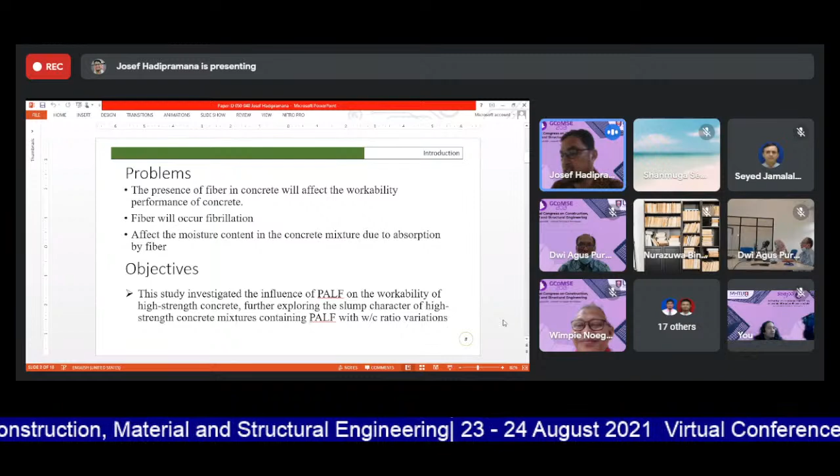Okay. In the meantime, the real problem of this study is that the presence of fiber in concrete will affect the workability performance of concrete. Fiber will cause fibrillation. The presence of fiber in the concrete mixture creates friction between the fiber and the concrete particles and inhibits the flow of the fresh concrete. So that's the fibrillation. Moreover, fiber will affect the moisture content in the concrete mix, and then the mixture will dry due to absorption of the fiber.

Therefore, the objective of this study is to investigate the influence of PALF on workability in high-strength concrete, further exploring the slump character of high-strength concrete mixture containing PALF with water-cement ratio variation. Okay, this is the material and method here.

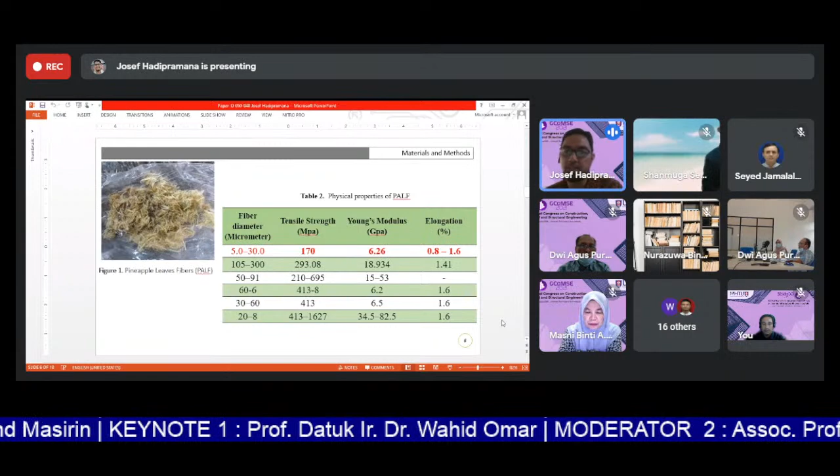Table 1 shows the result of analysis of concrete material properties as constituents of concrete to develop the high-strength concrete by Indonesian national standard. This is a figure of pineapple leaf fiber. The fiber has been processed and separated from the rest of the leaf. Each fiber has a diameter of approximately 12 micrometers, with a tensile strength of 170 megapascal.

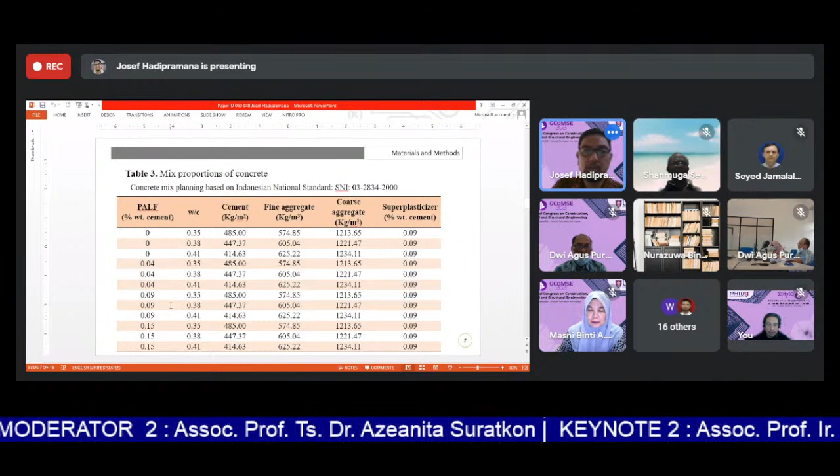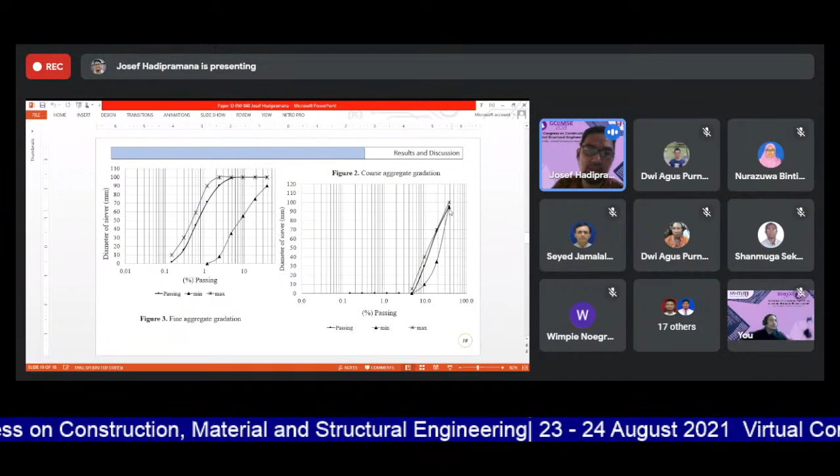So result and discussion. Figure 2 and 3 show the result of the sieve analysis of coarse and fine aggregate. This is the coarse. This is fine aggregate gradation. Both are included in the condition of high quality concrete aggregate. So the passing gradation is included in the condition of the standard here.

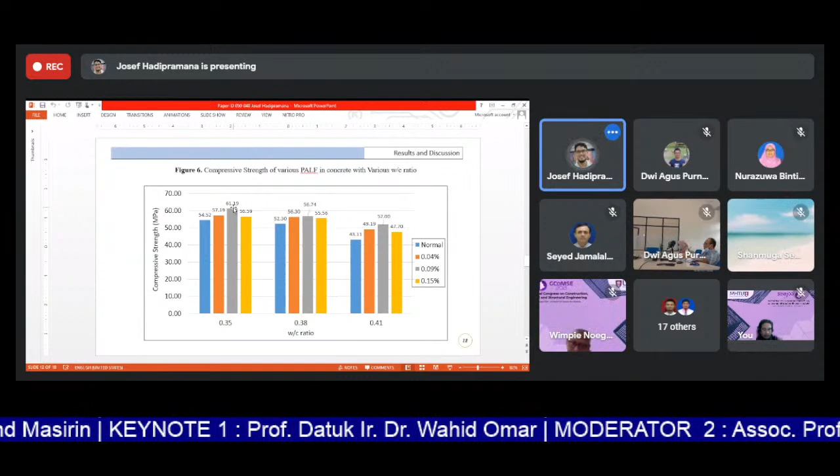Figure 6 shows the relationship of concrete strength between water cement ratio and compressive strength, where the strength of concrete with the lowest water cement ratio, 0.35 here, is the highest compressive strength. This can be understood because all studies show decreasing the water cement ratio will increase the strength of concrete. And in this study, the variation of 0.09 weight of cement is the highest one.

Figures 7a, b, c, and d show the relation between three variables: compressive strength, water cement ratio, and slump. These four images map the tendency of these variables for four PALF variations: normal, 0.04, 0.09, and 0.15. So in all variations the trend is the increase in water cement ratio, coupled with the slump in the yellow one, along with decreasing compressive strength. So all trends are similar here.

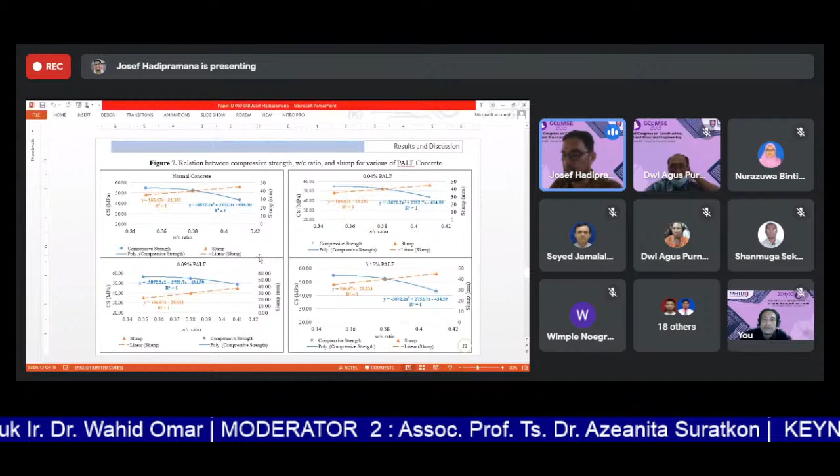But what is interesting is that the strength value of the four images here, for variables against the water cement ratio, is the same constant. We can see here the number is still the same, constant against the water cement ratio.

So the conclusion of this study is the addition of fiber in high strength concrete affects the slump value, but with water cement ratio and PALF percentage amount, they reduce the effect of the reduction. Lack of water due to absorption of fiber can be overcome by adding water following the absorption capacity of water by fiber. The low water cement ratio increases concrete strength despite PALF presence in concrete. The presence of PALF in concrete helps in bridging micro cracks in concrete, thus increasing the compressive strength of concrete. The relationship between concrete strength and water ratio has the same tendency for concrete with all PALF variations.

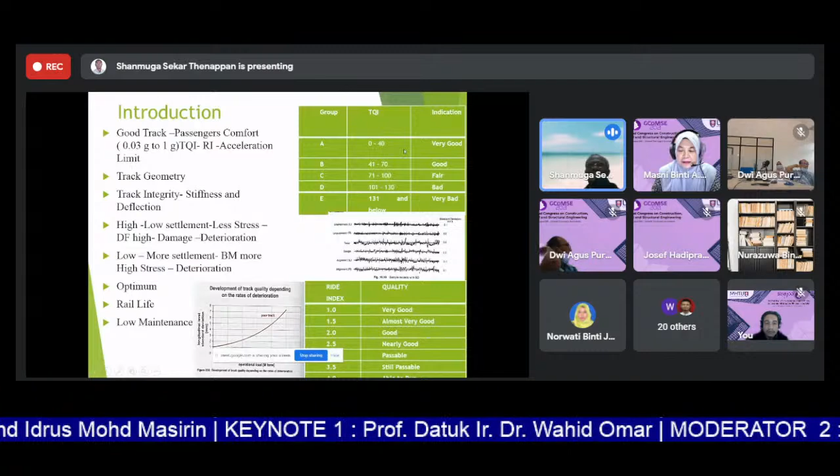Normally, after completion of the track - that is the ballast track - there is a machine called the track recording machine. That machine will measure the track quality index, the TQI. You see on the right hand side, that is the table, that is the rating. This TQI is the rate of 6-7 parameters in the railway track.

That is right and left level of the rail, the alignment of the rail, the twist, and the gauge of the rail - whether it is well maintained within tolerance. This is the average of the standard deviation of the readings. It will be captured by the track recording machine. That should be maintained for good track quality. It must be in the range of 40.

In the meantime, the ride index is measured in the car, and that will tell the jerk level. Jerk level is the acceleration limit, calculated for every kilometer. That has to be maintained in a very good condition, which is rated 1. This is how the rate of the track is measured.

This is how it is measured in the track. So the end goal of this is, when on board, the passengers should feel comfort - that means no jerk. The acceleration limit they have to maintain is 0.03 to 1 G.

Then, this is maintained by means of track geometry. If track geometry is perfectly okay, then you can maintain it. Then how is it maintained? It depends upon the track integrity.

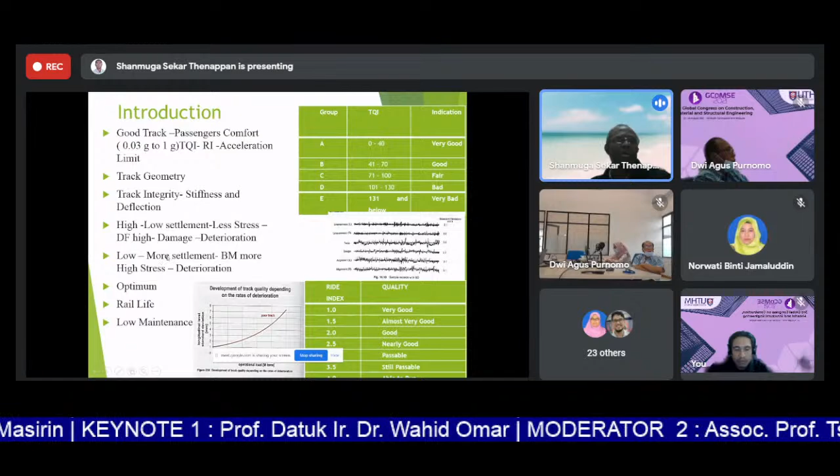Then what happens if the stiffness is low? If it is low, the rail will settle, the bending moment will be more, the stress in the rail will be more, and finally the deterioration of the track will be more.

So what will be the optimum value? According to research, many researchers have concluded there is no universal value, because it depends upon the specification of the project. What is the requirement? It varies. So we have to find out for this specific case.

Then if everything is okay, the rail life will be increased, and consequently the maintenance cost will be low. The picture here shows the behavior of the TQI, the operational load, and the condition of the track behavior. You can see as the load increases, for a perfect high-speed rail track, it will be maintained flat. When it comes to a poor track, it will be increasing.

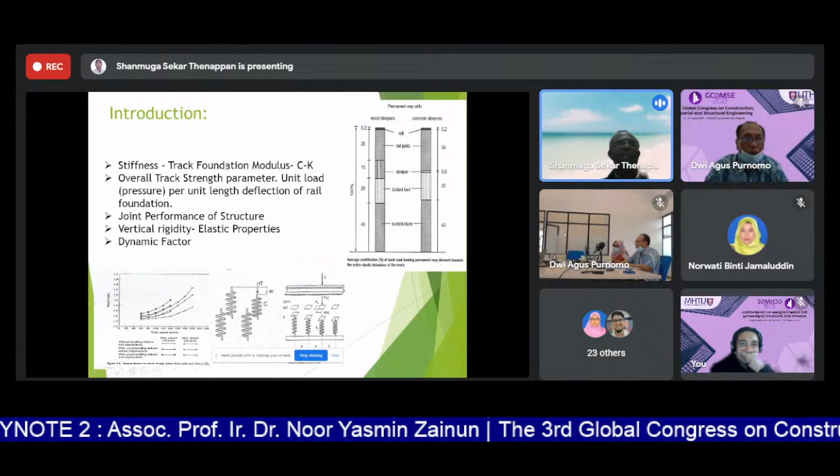Next, when it comes to stiffness, I would like to define it. Stiffness is referred to and defined in various literature and books by various names - it is called the track foundation modulus, or the value C, or in other literature normally they call it K - but the value is all the same, it is a derivative of the foundation, that's all. Then come to this definition, that means the overall strength parameter.

C is the overall track strength parameter. It measures the unit load pressure per unit deflection of the rail. It's actually the spring action - that is the pressure per unit deflection. Then it is a joint performance of the structure. You see on the right hand side, this picture shows the total contribution of stiffness to the entire track.

I take a concrete sleeper ballast track. You can see from this 43% that the substructure is contributing. That is the subgrade. Then there is a 22, that is the ballast bed, that is the ballast. Then there is a 0.8. Then the rail pad is 34 and a 0.2.

So this depends upon the vertical rigidity of the substructure. That is the major parameter contributing, the elastic parameter. Then the other factor is the dynamic factor. This dynamic factor is multiplied, normally as a compensating factor for the dynamic effect of the moving load.

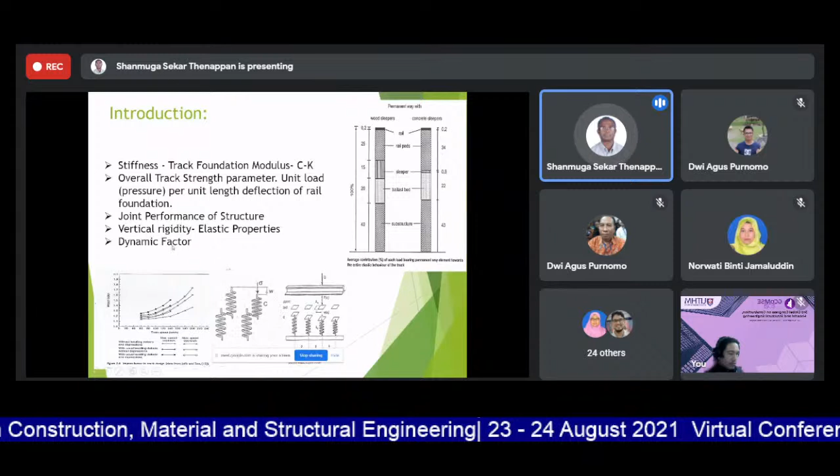This factor is multiplied in the design of the rail. By seeing this picture, on the left hand side, as the speed increases, the dynamic factor increases. Also the irregularity of the rail and the track condition, if it is very bad, it will also be increasing.

Then come to the problem statement. In the double tracking project in the northern part, the TQI index, what I showed you earlier, after completion of 5 years, it is maintained in the track at 40. You see on the right hand side, the standard deviation - as the load increases, the period increases, the standard deviation has to increase.

But what happened here is after 5 years also, it looks as if it is a very, very good track. That means the standard deviation is not following the trend. Overall, it is concluded, there is doubt that the stiffness will be very high.

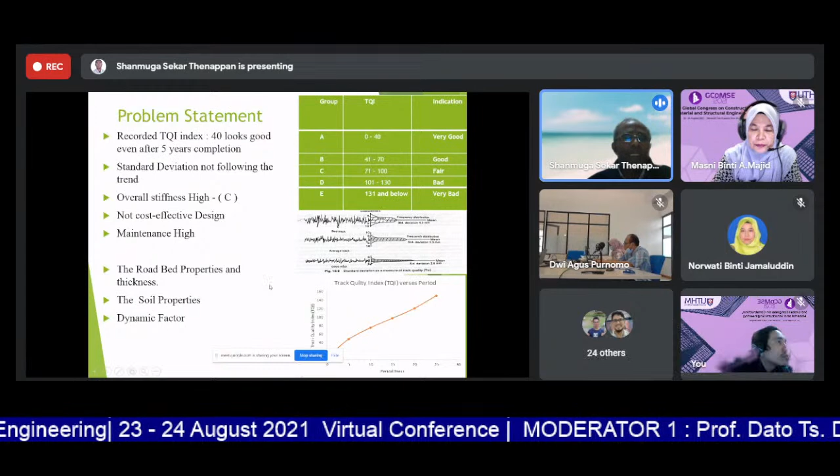Then it leads to a not cost-effective design, and it may result in relatively high maintenance. So there is a necessity to investigate the roadbed material and thickness, and what are the soil parameters and the dynamic factor assumed in the design. So the author is interested in investigating this.

As I told you, the track stiffness - I have to touch a little bit on the track stiffness, the C value, and how it is used in the design. There are two methods being followed in the ballast track industry - one is the Zimmermann method and the other is the DSM method.

The Zimmermann method is a continuous method. This is a discrete method. The discrete method is a discrete support model, while this is a continuous beam method. The difference between these two is not much, it's more or less the same. But anyhow, the discrete method is more accurate.

So I compared the two designs used in the double tracking for the northern section and the current method. I compared the rail stress computation. The general formula is the same, with the dynamic factor.

Then come to the mean stress - how they calculated it in this method, the Zimmermann method. They use the C value directly. When we come to the modern method, they have used D, which is actually a derivative of the C value. There is no problem with this.

But the thing is here, in this method, the contribution of the bed is not included in the Zimmermann method. Then come to the dynamic factor in this method.

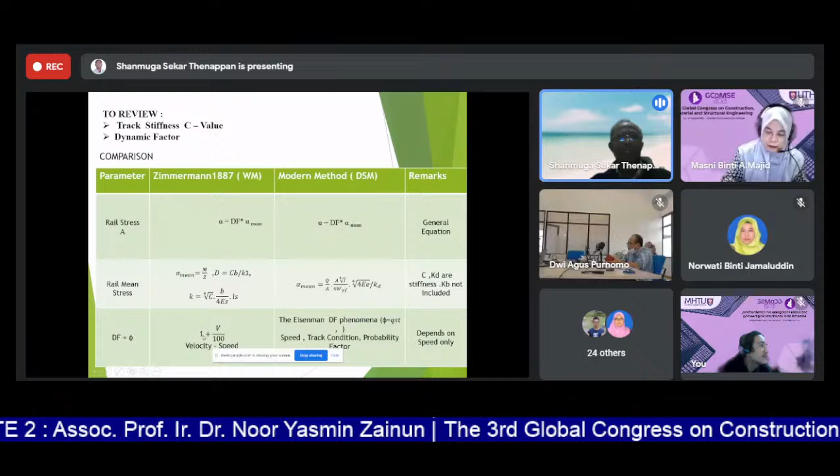Dynamic factor - according to the design, they use only velocity, the speed of the train only, they have used. But that is not the only contributing factor. Of course, V is a contributing factor, but the other factor, according to the modern method, the Eisenman method.

You have to look at the track condition - what type of track you are using, whether high-speed track or normal track. The track condition factor you have to use, then how much accuracy you need. So this dynamic factor is a multiplication of three factors, that is more appropriate. So depending on speed only is not appropriate. So this is problematic, this is the problem.

So the problem stated here is there are two things I have to investigate - the track stiffness and dynamic factor. Then come to the objective.

So in this, I have to optimize the track design based on the C value by using a simple plate bearing test. Plate bearing test is a simple test. This one does not require stopping the train, it is very easy to measure.

No implementation of stopping the train. It is very easy, construction-wise easy, labor-wise it is very easy. Then I have to evaluate the appropriate dynamic factor by using the modern method.

By doing this, you can choose the maintenance cost, which will be reduced.

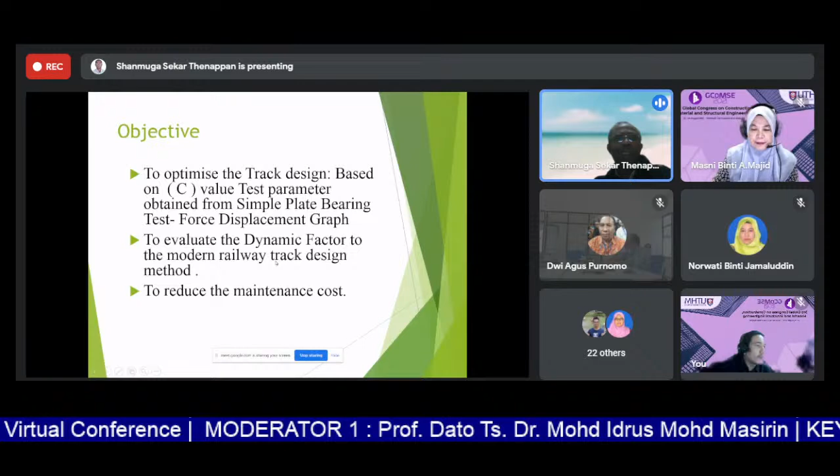Then the review methodology. Rail stress is evaluated by the plate bearing test, determination test using the double tracking project test result. Then, other thing I am doing is the finite element analysis using the same plate bearing test for different thickness of the ballast and how it varies with the subgrade soil.

Subgrade soil I categorize into 3, low to high.

So let me explain how the rail stress is analyzed. There are 4 steps. First is the plate bearing test, which is carried out. The C value is determined. That is the strength of the overall track.

Then the mean bending stress. Then you determine the dynamic factor, then multiply with the dynamic factor. Then this final stress is to be checked for whether the fatigue strength is allowable or not.

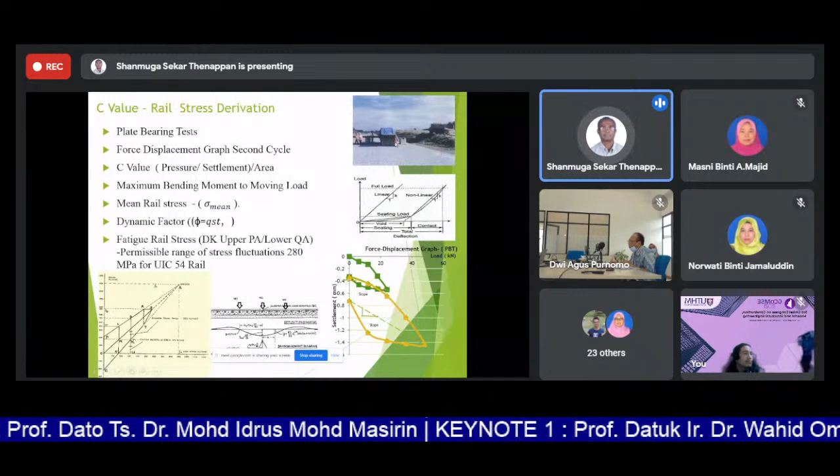Let me explain the steps I told. First is the plate bearing test. This is the test - you can see on the right hand side, the track is completed. It is ready to lay the sleeper. This is the plate bearing test site.

You can see this field test has been carried out at the double tracking project. There is a load cell here. This is a schematic diagram.

The load applied is the rail seating load, in two increments. This is the first cycle and second cycle. The graph is drawn for the first cycle and second cycle.

This first cycle, it's like immediately the track with the voids - that means, let me go back here. It is actually an idealized diagram for the plate bearing test.

When it is the first cycle, it will be linear. When it comes to the second cycle, all the voids are filled. After tamping the track, it will be simulating the accumulated loading. That means the actual stiffness of the track can be measured by the second cycle. It is actually a non-linear behavior.

The slope of the thing is calculated, then the C value divided by the area of the plate used, then you can get the C value. C value is the pressure by area. This is the parameter we are getting from the test after completion of the track.

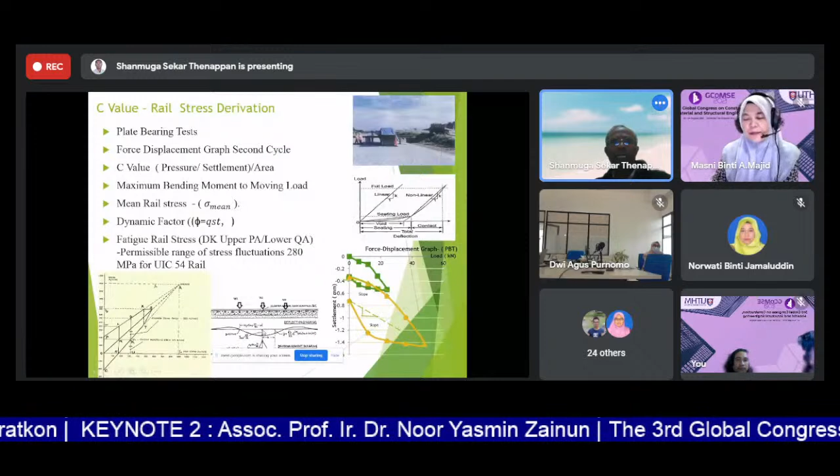From the C value, we calculate the bending moment using the Zimmermann analysis. I am using the 3-wheel load, the envelope of the bending moment and the deflection you have to get from the Zimmermann envelope. After getting this, the rail stress is calculated.

Then it is multiplied with the dynamic factor. After getting the dynamic factor, we check whether the fatigue rail stress is within the limit or not. We have to check with the Smith diagram.

The left hand side is the Smith diagram. From O to A, that is the envelope - the envelope is the mean stress. The allowable limit is from P to PA and Q to QA.

When we come here, we are using the UIC 54 rail. This 54 rail has a value of 900 - 900 is the yield strength. The allowable FY is 540.

So the stress limit is, you have to maintain within this. What is the stress limit for this? It depends upon what is the temperature in the country and what is the manufacturer's residual stress.

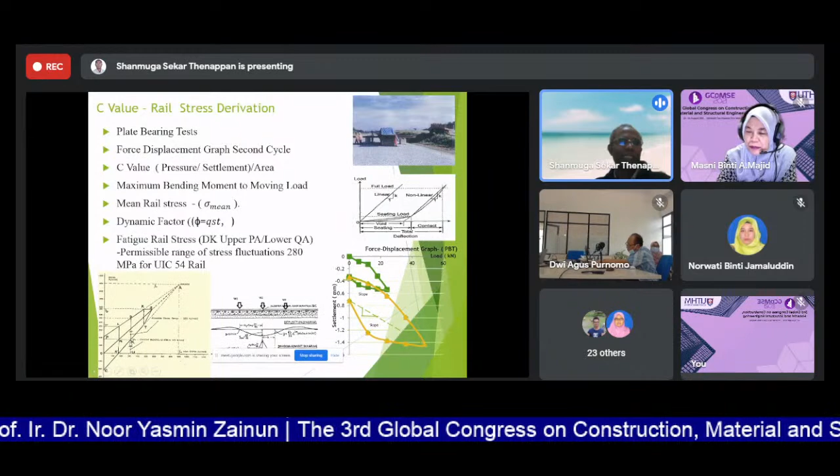That residual stress from the x-axis is 180. So this is the limit, they cannot exceed it - this limit is 280. This is the way to get the final stress in the rail.

Then coming here, after that what I did is a numerical analysis. I modeled the plate bearing test as a simulation of the track. That is 2 methods I did - one is static, another is dynamic analysis.

The static model represents the subgrade, subballast and ballast. This subgrade I take as 3 subgrades, one in the range of 25 to 48 - that means low, medium, and high, according to whatever soil is available at the site.

Then the subballast and ballast - the subballast is constant. This is the ballast, varying from 100 to 500. So overall, this material is a granular material from 600.

By the finite element analysis, I am varying this thickness for the different subgrade, and the deformation I got from the analysis - that is the static analysis. The aim of the static analysis is to find what will be the deformation for different subgrades and different ballast thicknesses.

Then coming to the dynamic analysis, the same model has been used. In this model, different speeds have been created to get different frequencies for different speeds, to get the dynamic stress at the subgrade level, so as to find out the dynamic factor.

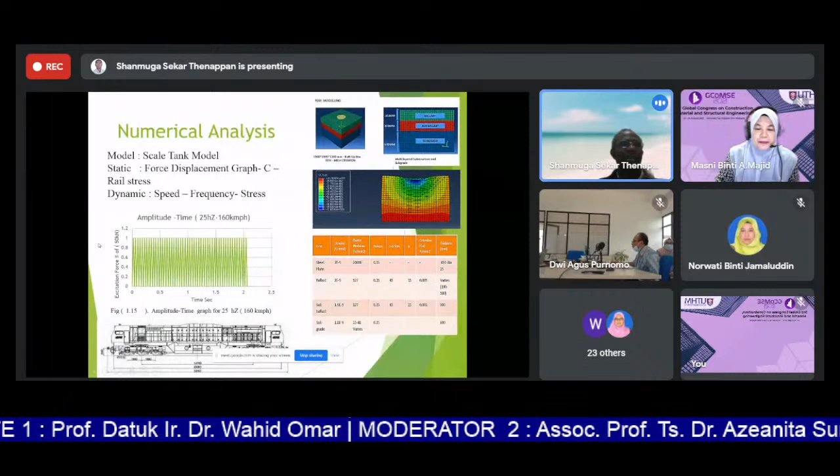So for this, I have used the load, the 50 kilonewton load which comes to the rail seat, coming to the one rail seat, 50 kilonewton. The load I use for this is a KTM double track. They use the locomotive with a 200 kilonewton. This is the locomotive. Then this figure is what I created, the amplitude time graph for the maximum speed 160

km per hour. So the aim of this is what is the dynamic factor derived from the finite element analysis for this 160 km/h. So coming back to the result, the result what I got is this vertical displacement for the different grade. Then is a ballast thickness. Then I got the derived C value. Then is a mean stress.

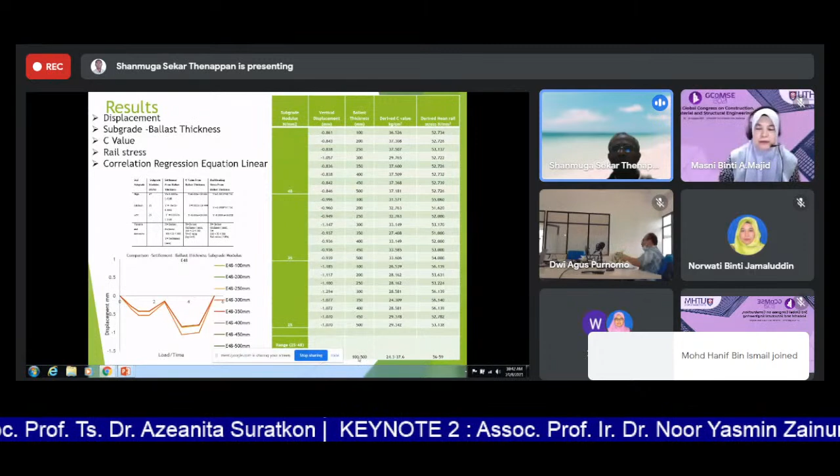So this range is 25 to 48. This is a vertical displacement, from maximum to this is the range. Then the ballast thickness is 100 to 500. Then derived C value and derived mean stress. Then this is the first cycle and second cycle picture of the displacement graph for the 48 grade. We can see the displacement is increasing. The maximum we got is 1.2.

After getting this data, I have simulated the graph. I found the correlation equation for this. I got the correlation equation for the different subgrade or the different thickness. What will be the expected C value and rail bending stress?

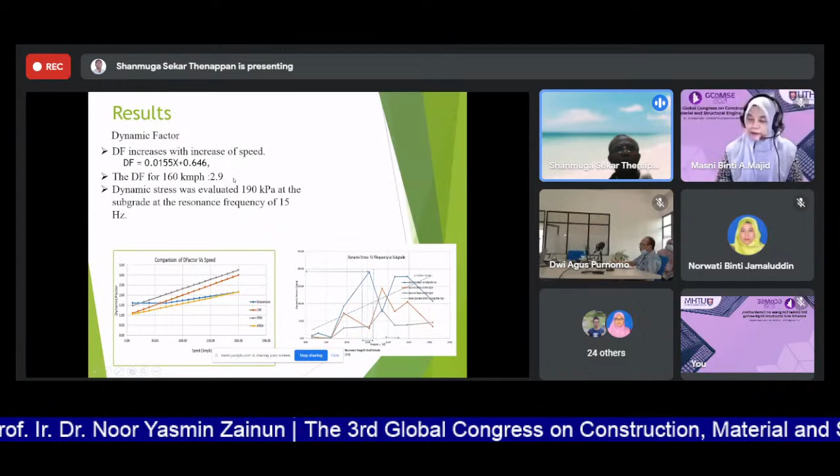Then come to the dynamic factor. The dynamic factor from the analysis, I got the linear equation, this equation for the dynamic factor 160 km per hour based on the Eisenmann method. I got the 2.9. This is the dynamic stress at the subgrade for the different subgrade. This one I look for only 300 thickness because the project they use the 300 thickness.

Then this figure is a dynamic factor. I compared to the other modern method, JNR method and other methods. The finite element method is a little bit high. This is the dynamic factor obtained from the finite element analysis. What I am getting for the 160 km per hour is a 2.9.

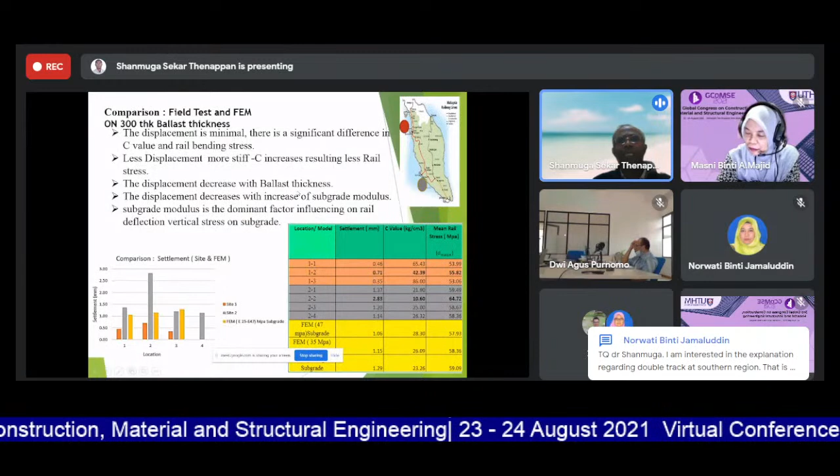Actually the displacement is minimal, but there is an increase in C value and rail bending stress. The less displacement, it will be more stiff, and the rail stress will be less. The displacement decreases with the ballast thickness. The displacement decreases with the increase of subgrade modulus. The subgrade modulus is a dominant factor, which is controlling the deflection and the vertical stress on subgrade. We can conclude from the graph.

You can see this one, the site 1 and site 2 and the finite element analysis. The finite element analysis settlement is also in agreement; it is between the two values. Then comparing these two, site 1 we got is 0.7 mm, site 2 is 2.8 mm. It looks like the rail experiences less bending stress in site 1. It is much stiffer than site 2.

The allowable live load stress by using the Smith diagram, the allowable limit for this is 280 MPa. When we interpolate for our country, this allowable limit is 280 for the live load. So site 2 reaches 187 to 280, that is nearly 74%. Then site 1 is 161 to 280, that is 80%. This zone is a free zone.

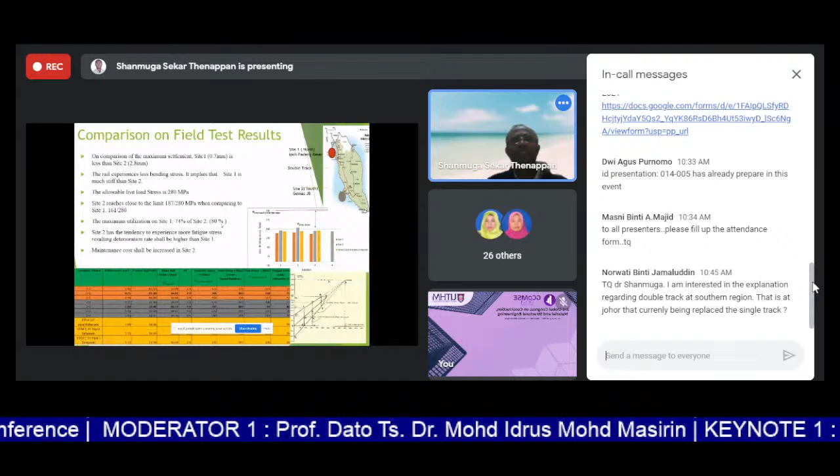That means 80% is achieved by this one, 74 is achieved by the site 1. So what we can conclude, site 2 has the tendency to experience more fatigue stress. The deterioration rate will be higher here. Then ultimately site 2 experiences more maintenance cost.

So in the conclusion, static and dynamic analysis of ballast track structure has been studied for the different railroad bed conditions. That means different ballast thickness and different subgrade soil, using numerical methods. In this, we have taken into account the elasto-plastic properties of the subgrade soil and ballast. That is, non-linear behavior has also been captured.

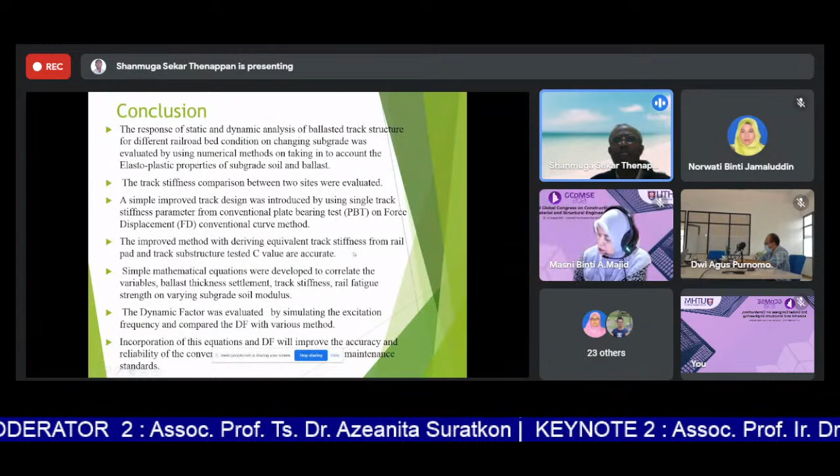The track stiffness comparison has been made by the two sites. A simple plate bearing test method, from which we use the force displacement graph, is a conventional graph method, which is very cheap when compared to the new method, which requires more implementation, stopping the train, and the labor cost will be very high. The improved method I adopted is an equivalent track stiffness added with the rail pad.

It is an accurate method. Simple mathematical equations were developed to correlate the variable ballast thickness. This will be very useful for QA/QC control. The dynamic factor was evaluated simulating the excitation frequency and compared with the various methods. Incorporation of this dynamic factor in the equation will improve the accuracy and reliability of the track construction. Then we can maintain the maintenance standard. Thank you.

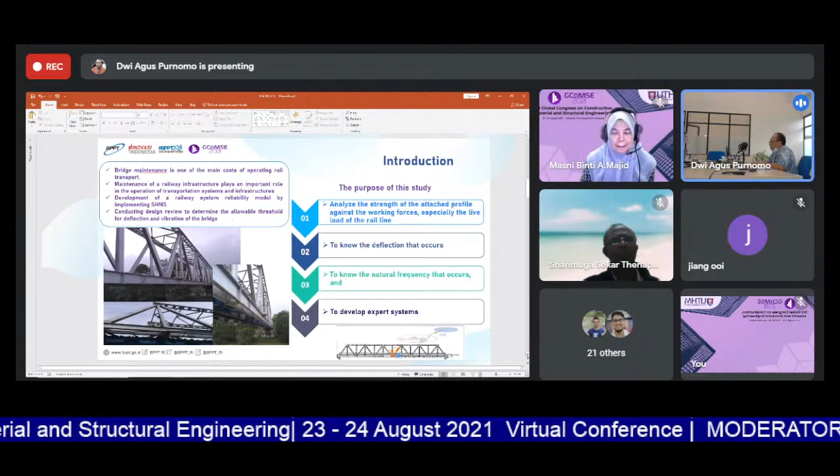Why did we choose the title initial implementation? Because we don't have the workshop drawings of the railway bridge that is my research object, so we start from zero in this research. Based on the history, we found that bridge maintenance is one of the main costs of operating rail transport. The maintenance of railway infrastructure plays an important role in the operation of the transportation system and infrastructure.

Then we develop a railway system reliability model by implementing a structural health monitoring system and conducting a design review to determine the threshold levels for the deflection and vibration of the bridge. The purpose of this study, first, is to analyze the strength of the steel profile against the working forces, especially the live load of the rail line. Second is to know the deflection that occurs, third is to know the natural frequency, and fourth is to develop an expert system.

Next, we move on to the literature study. We found that in Indonesia many railway bridges were built more than 100 years ago. Many of those bridges have become structurally deficient due to gradual deterioration over time. The loading conditions of railway bridges have changed in recent decades due to increased freight volume, and there has been increasing demand for improved transport infrastructure in Indonesia.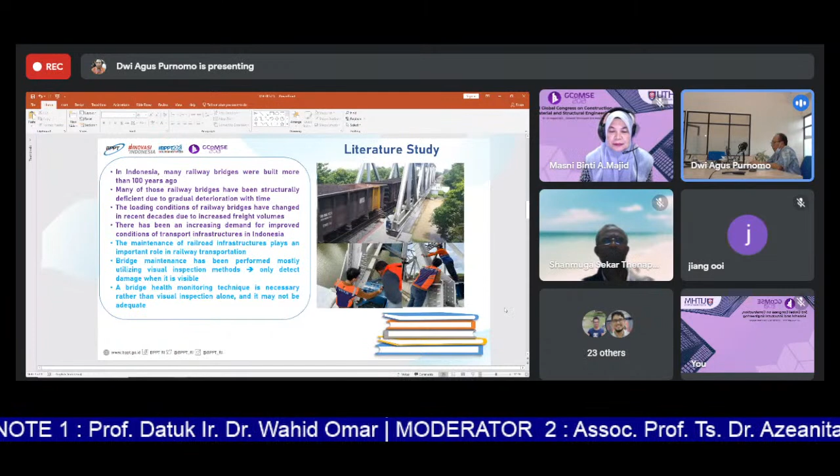The maintenance of railroad infrastructure plays an important role in railway transportation. Bridge maintenance has been performed mostly using visual inspection, which only detects defects when it is visible. A bridge health monitoring technique is necessary, since visual inspection alone may not be adequate. Next, we move to the research methodology.

On the left side is a flowchart of the study activities for the railway bridge. The bridge is located in South Lampung, Lampung province, near Tegineneng district. We start from the primary data and the reference standards. With this primary data we enter the bridge modeling, where we apply many types of load, like live load and others, and then we analyze these loads to find the deflection, stress, bending moment, normal force, displacement, and natural frequency.

Through this data, we use a dashboard design to evaluate the structural health of the bridge, and that is the end of the study process. Based on the research methodology, we discuss two matters. First is to evaluate the existing steel railway bridge structure.

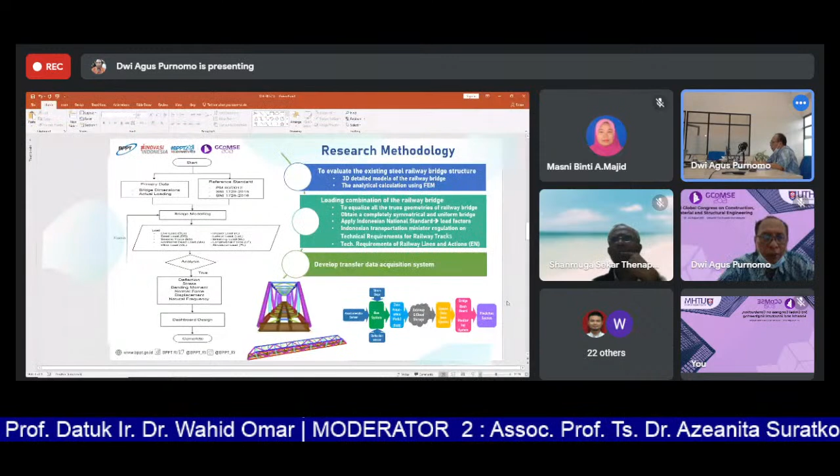In this case, there were a 3D detail model of the railway bridge and also the analytical calculation using FEM. And then we discuss the loading combination of the railway bridge. In this case, there were items to equalize all the truss geometry of the railway bridge and obtain a completely symmetrical and uniform bridge. And also we apply the Indonesian national standard and also the Indonesian Transport Minister regulation on technical requirements for railway tracks, and also technical requirements of railway lines and actions. These are the 3 standards we use to optimize my analysis.

And then the other methodology is we develop data transfer acquisition. Based on the data acquisition, the structural health monitoring system covers the components of the data retrieval process via a sensor system with parameters of deflection, stress on the bridge, and vibration. Via the base system, the results of sensor monitoring are processed and sent directly to the data acquisition module, or DAQ, in the bridge location area.

The results of the DAQ data collection are sent to storage through the gateway into cloud storage. The infrastructure control center can utilize the actual data on cloud storage to monitor bridge condition online in a dashboard. Based on the data set on the cloud storage, and a view of the bridge aspect in the near future, the bridge health prediction system can be developed. This is the drawing on the right side below. This is the process of the sensor data transfer flowchart.

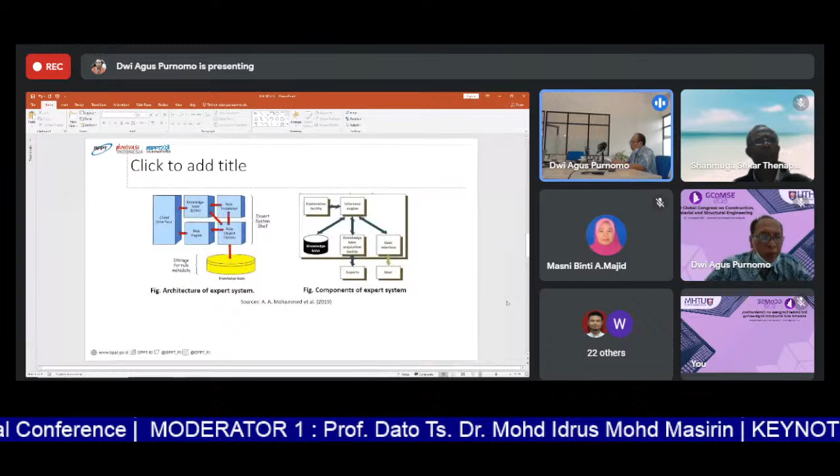And next, this is a highlight of the architecture of the expert system involved in my research. The left side is the architecture of the expert system, which consists of the client interface, knowledge base editor, rule translator, rule engine, and rule object process. And the expert system is involved with the knowledge base.

And the right side is the components of the expert system, where we involve the inference engine supported by the explanation facility, and with the inference engine we involve the knowledge base, the knowledge base acquisition facility, and also the user interface to support the expert and user. Next page. We discuss the results and discussion.

We discuss the structural characteristic, maximum capacity. In this case, we found that the loads acting on the bridge are not greater than the bridge capacity, and the ratio of the applied load to the bridge capacity is less than 1. And we discuss the maximum bridge deflection. In this case, we found that the maximum deflection limit for the frame is L/1000, or equal to 51.6 millimeters.

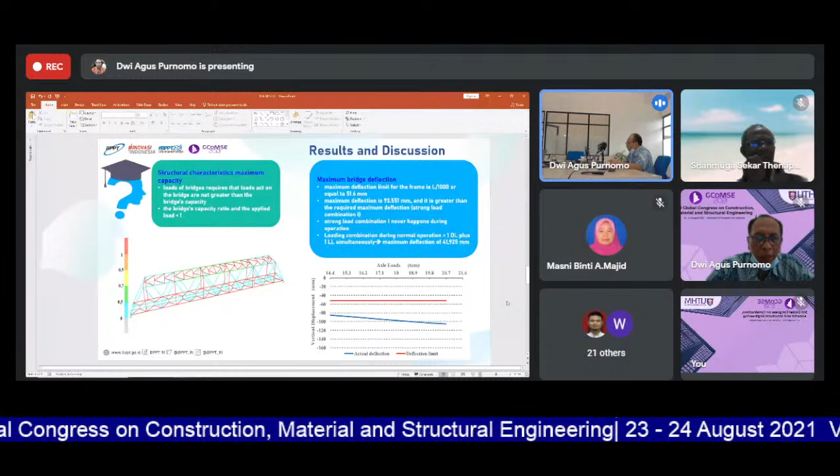The maximum deflection is 93.551 millimeters, which is greater than the required maximum deflection. It means strong load combination 1. Strong load combination 1 never happens during operation. And the loading combination during normal operation equals 1 dead load plus 1 live load simultaneously. Therefore, the maximum deflection is 41.925 millimeters. In the drawing on the lower right side, the red line is the deflection limit and the blue line is the actual deflection.

And this is the maximum deflection of the railway bridge we researched. The left side is the drawing of the bridge capacity ratio. And based on this drawing, we collect data to be accumulated in the dashboard design. Next.

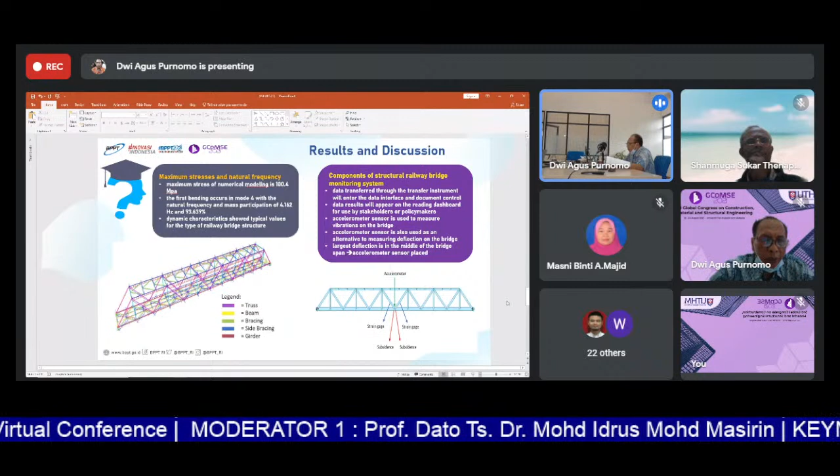We discuss the maximum stresses and natural frequency. In this case, we found that the maximum stress of the numerical modeling is 100.4 megapascals. The first bending occurs in mode 4 with a natural frequency and mass participation of 4.162 Hz and 93.639%. The dynamic characteristics showed typical values for this type of railway bridge structure.

And then on the right side, we discuss the components of the structural railway bridge monitoring system. In this case, we found that the data transferred through the transfer instrument will enter the data interface and document control. The data results will appear on the reading dashboard for use by stakeholders or policymakers. The accelerometer sensor is used to measure vibration on the bridge, and is also used as an alternative for measuring the deflection on the bridge.

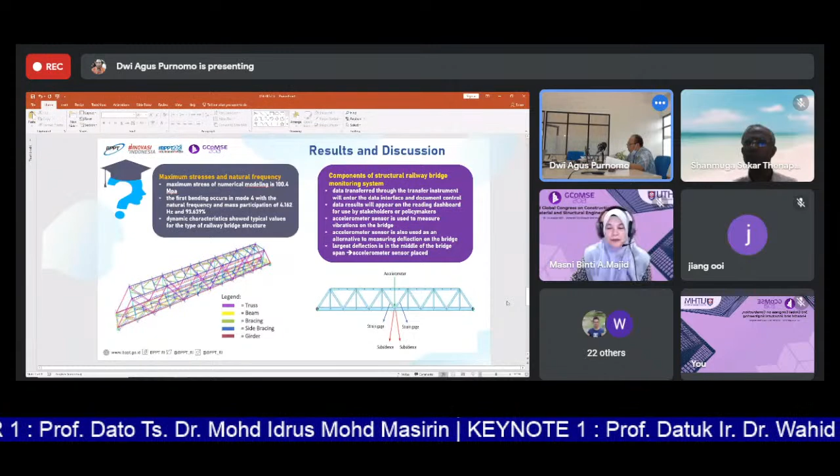In this case, we use 3 types of sensors: accelerometer, strain gauge, and also subsidence. And the largest deflection is in the middle of the bridge span, so we place 3 sensors there. Next page.

Concluding remarks: based on the analysis above, the numerical model showed that the critical boundary conditions were determined by deflection, while the stresses and natural frequencies were within safe limits. Maximum deflection occurs at the center of the girder. Other than at the girder center, the deflection is still very far from the maximum deflection.

In terms of the service load, the deflection that occurs is still in safe condition, provided the bracing frames are dimensionally upgraded. For the railway bridge structure, it can be stated that the bridge is still safe under stress control because the stress is smaller than the allowable stress. The frequency to be reviewed is the frequency of the first bending of the structure, and the mass participation must be greater than 90%.

The numerical analysis results showed that the first bending occurs in mode 4, with frequency and mass participation of 4.162 Hz and 93.639% respectively. Data from sensor sampling are collected by the data acquisition instrument and sent to the data processing center via instrument transfer, which is then used by an automated expert system that can be reached in the reading dashboard on the bridge structure. Next.

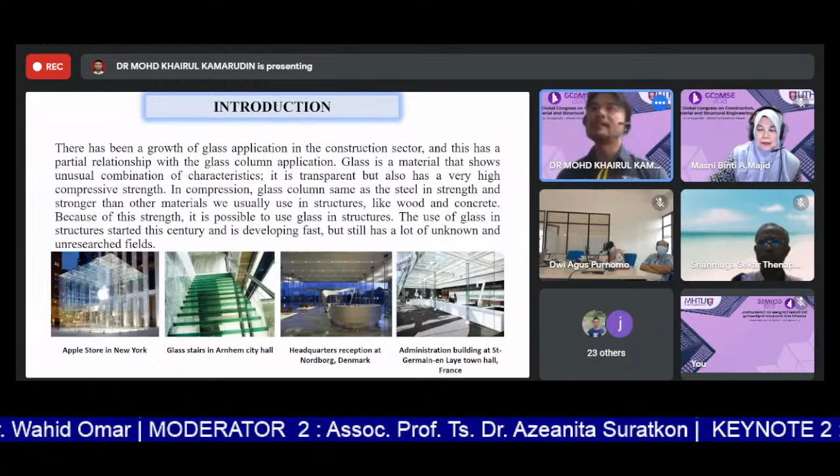As I mentioned just now, particularly glass in Europe, because of the aesthetic value as well as the way the architecture looks, the vision of the building itself, because glass has this intrinsic behavior of transparency.

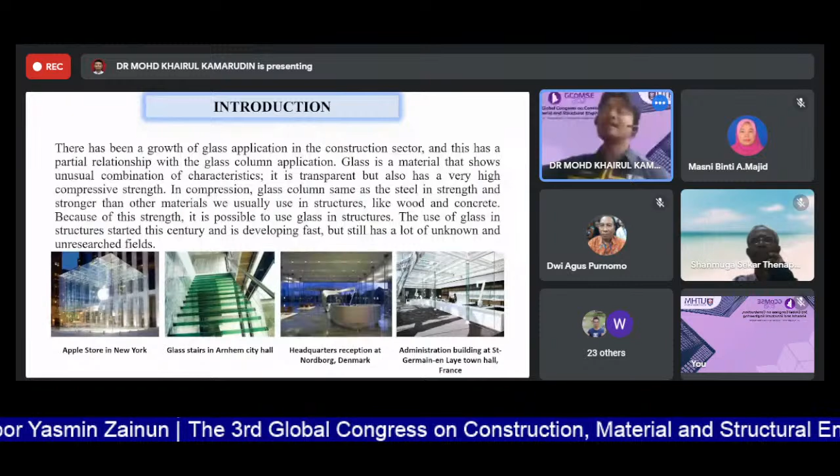That comes to certain cases where advancement in glass technology is proposed, for example using double glazing. Now they have this technology of dynamic glass wall, where the glass wall accommodates the IoT system. When the sun rises, the glass wall can change the intensity, similar to the tint value or tint layer in a car, to ensure that a very limited amount of light comes in as shading. So that is the technology we have now.

Particularly when we talk about glass column, this has been used in existing buildings, as you can see from these two pictures on the right. We have this glass column in one of the headquarters buildings in Denmark, and one in France. If you look clearly, they use the cruciform section of glass column, which is a panel of two glasses combined together in a cruciform section to sustain or resist the load distribution in the building.

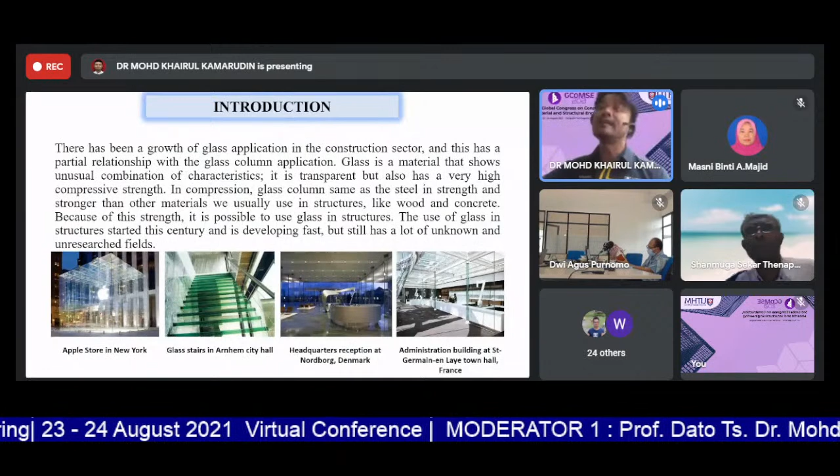So basically this structural glass has been there, and we in Southeast Asia have yet to have the intensity of structural glass building, but we can see from a whole lot of hoteliers, they have this glass wall curtain wall as an eye catcher for the building itself.

So in this case, this research technically is coming from the extension work from what we did in 2018, where a series of experimental work on a glass hollow tube with certain dimensions was tested under compression.

For the analysis modeling, we used Abaqus to look upon the usage of the brittle cracking material model available in the Abaqus software. From this idea, we wanted to look upon crack propagation in the tubular glass column, as well as carry out some parametric study in different dimensions.

We looked at the effect of different slenderness ratios that can contribute to the glass column integrity. From these two objectives, we conducted this using the Abaqus platform with the brittle cracking material model.

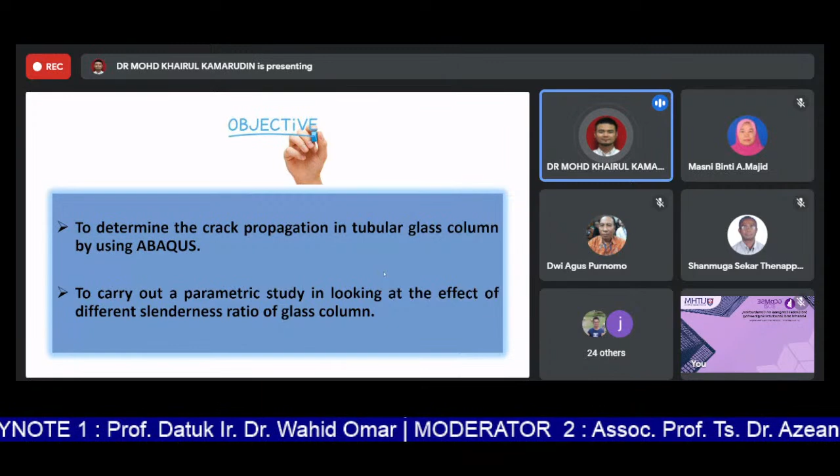As a significant contribution, we wanted to check when we conduct this analysis - we would like to extend the investigation further if we can define parameters for the structural glass, because currently we yet... apparently it was the first step for us to ensure the result is reliable.

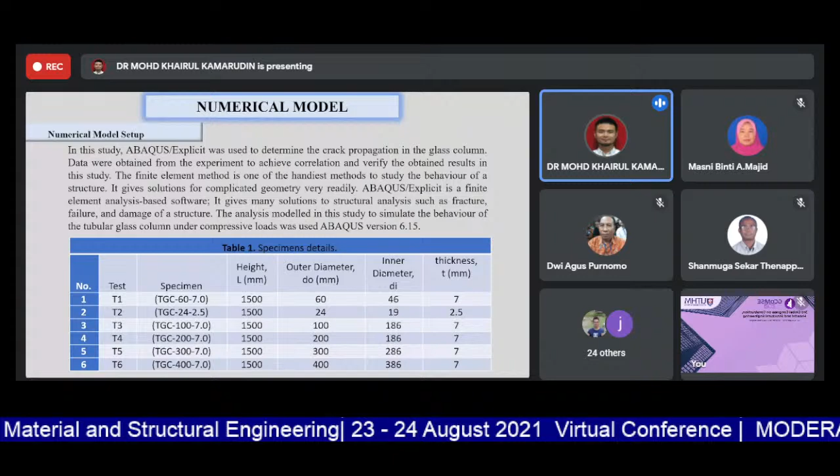Technically, the most important configuration that needs to be included in the analysis is to ensure that we had the parameters for the crack after the collapse happened and so on. That parameter is very important to conduct this brittle cracking model in Abaqus.

Basically, we have 6 different dimensions with the same height, with different outer diameter and inner diameter, and also the wall thickness of the glass tube. When we conduct this analysis, the first part, when we look upon results, is in terms of the failure mechanism. We managed to identify 2 different characteristics for the failure mechanism.

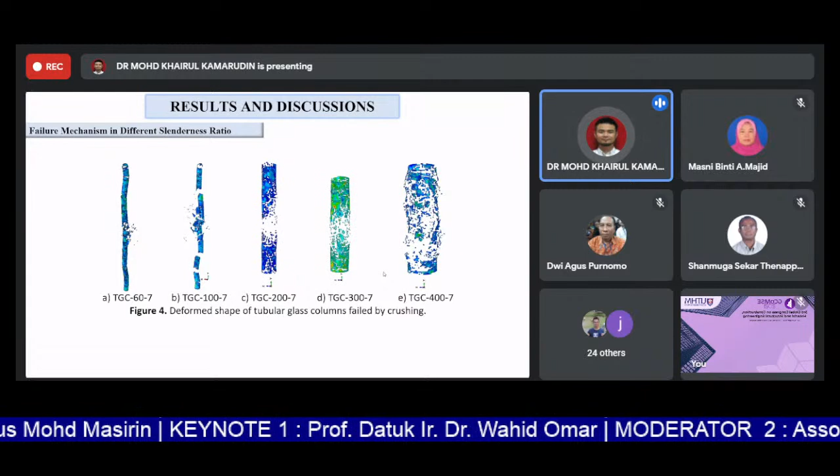When we have a quite small or lower slenderness ratio, we expect the glass column to fail under crushing. But when we have a slenderness ratio more than 40, the impact or failure predicted is in terms of buckling failure. This case is comparable to what we had from the experimental work previously, as the same constant slenderness ratio of 40 is a benchmark to give us a result on whether the glass column fails either by buckling or crushing.

In the experimental work, this is the size of a 24 diameter glass tube with a 2.5 wall thickness. The glass is expected to buckle, and then when we conduct the analysis, it's sort of...

At the midsection of the columns, we tend to see this as a comparable kind of result between the FE and the experimental work. Same goes to what we had here.

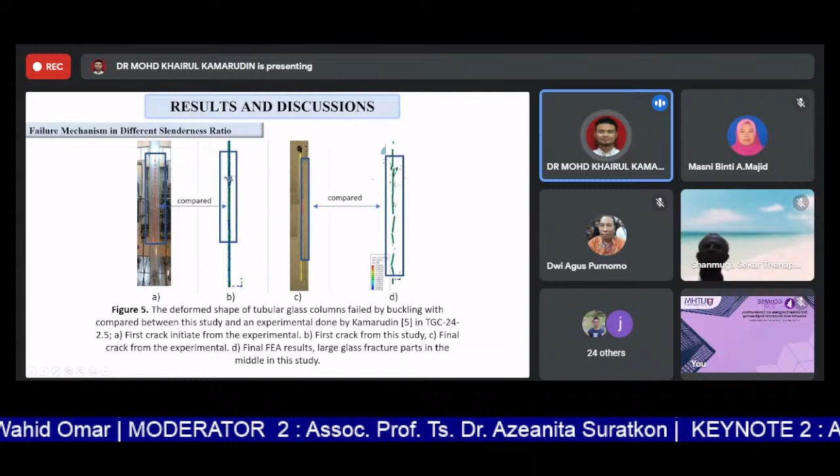This picture shows the post failure, where only the remaining pieces of the glass remain at the end section, whereby when we had the FEA, we had these multiple kinds of breaking.

When we look upon this load and axial displacement, we plotted this graph from the experimental work with different samples T1, T2, T3, T4, which are from the same dimension - it's just that we have 4 of them.

So we plotted the Riks method available in Abaqus, which has been conducted in terms of capturing the post-buckling behavior of the structure. But the result from the Riks method is quite far off from what we had from the experimental work. It tends to overestimate, and the stiffness is quite far off from what we had.

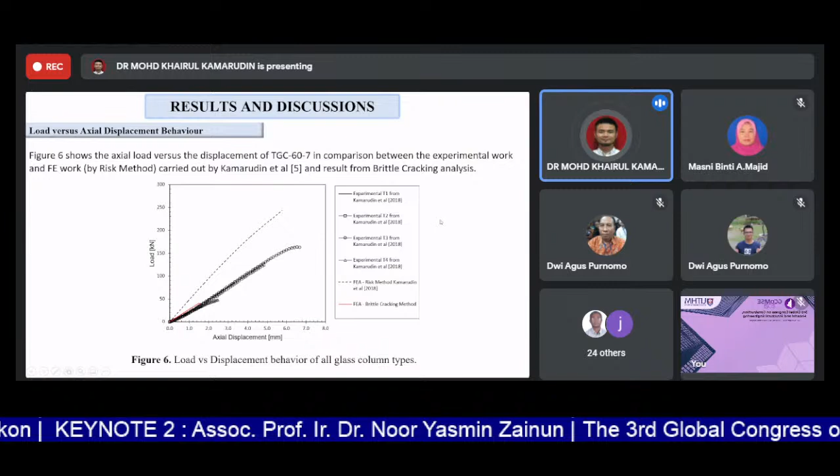So for this paper, we wanted to enhance the exploration in the FE by using the brittle cracking method, and we managed to capture quite a significant result with a quite apparent gradient of stiffness of the glass. It's just that the result we got is an underestimate compared to what we had from the experimental work.

As a justification, we understand that for glass specimens, we cannot take the result as an average, because even though each glass has the same geometrical dimension, glass has a unique character that cannot be quantified - each glass has what we call an initial face crack on the surface. That initial crack cannot yet be quantified. We are now trying to come up with a methodology on how we can quantify the initial crack on the surface of the glass, which relates to flaws. We wanted to keep that in mind to conduct this analysis further.

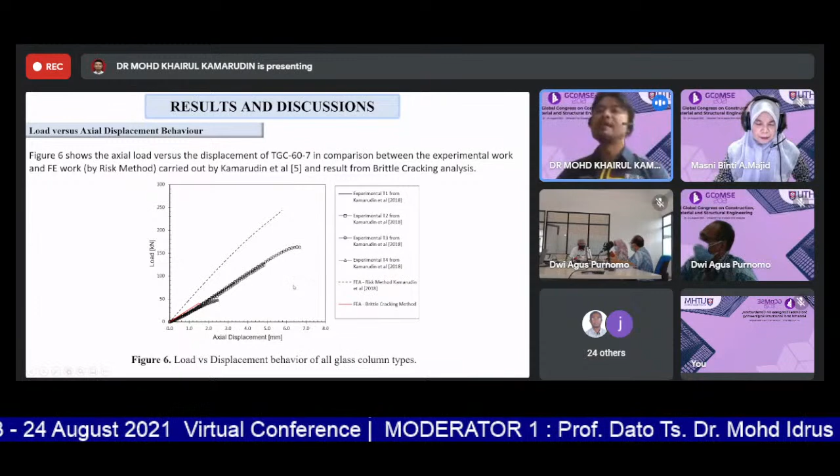But somehow we want to share this information - by using the brittle cracking method, we managed to capture quite an agreeable kind of result, a correlated result compared to the experimental work.

But this should not stop here. This information, we're going to continue plotting the slenderness buckling curve of the column. So at the end, we managed to get a very useful result that can be the point of reference for the designer to be able to design the structural glass.

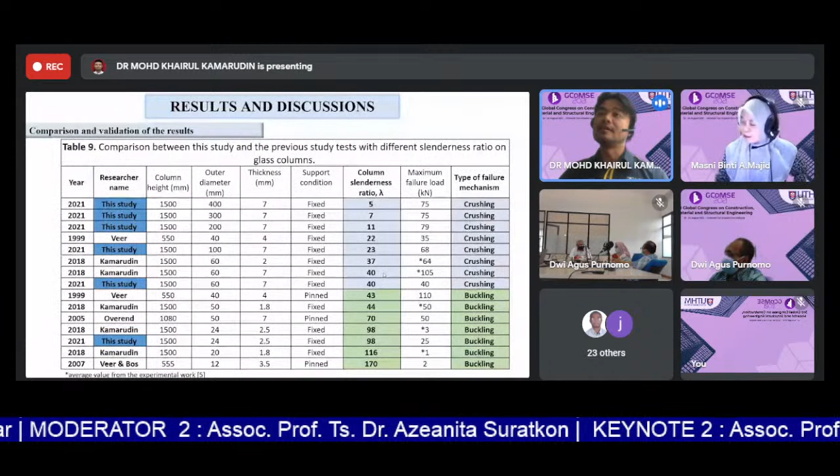So in this way, we had in mind the slenderness ratio as a classification to identify whether the glass is a slender or short column, as well as the usage of the brittle cracking method in Abaqus, which is very useful for researchers to embark into looking at the crack propagation mechanism of structural glass specifically. And these are the references, and for that, thank you very much for listening.

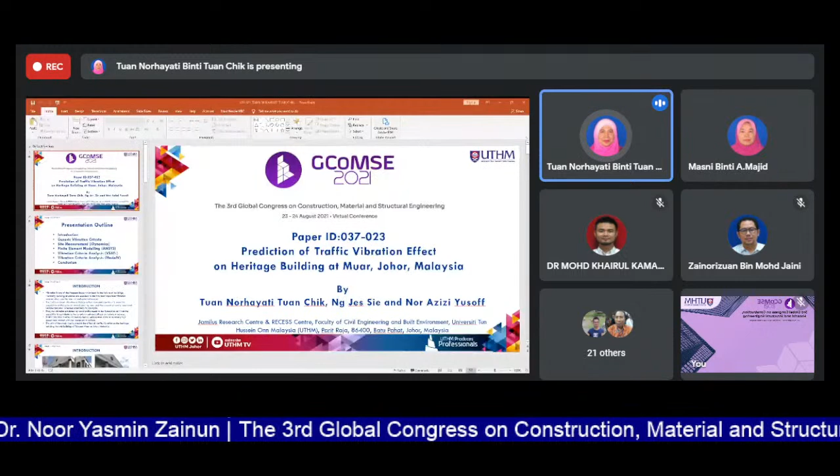So the title of my paper is the prediction of traffic vibration effect on heritage building at Muar, Johor, Malaysia. This study was investigated by my ex-students within Jamilus Research Center and also the Research Centre for Soft Soil. The presentation outline: first the introduction, then the generic vibration criteria that we use, the site measurement, then finite element modeling using ANSYS, the detailed vibration criteria analysis, and lastly the conclusion.

So as an introduction, as we know, vibration is one of the frequent issues which lead to the failure of buildings.

Okay, normally, yes, it's not moving. Okay, so I will use a normal view. Yes, I already shared. Can you see it or not? Okay, let me. Is it moving or not? Is it okay? Maybe I cannot use presentation mode, just PowerPoint mode. Is it moving now? Okay. Is it okay now? Okay. So can I move on?

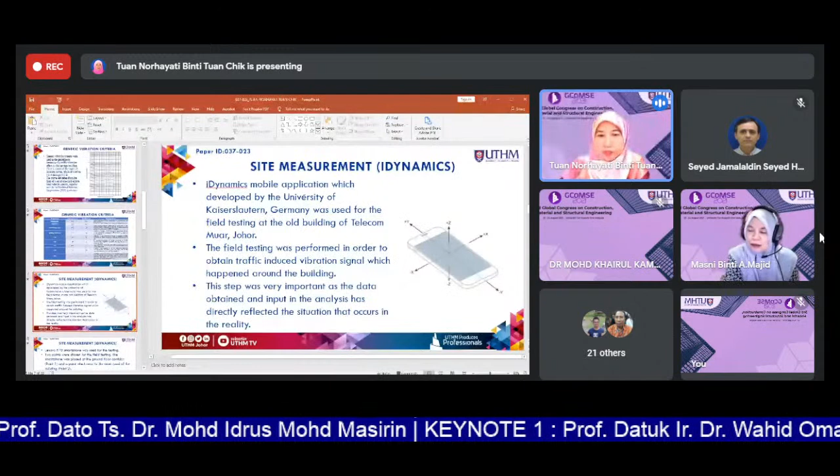So the field testing was performed in order to obtain the traffic-induced vibration signal which happened around the building. This step was very important as the data obtained and input in the analysis directly reflect the situation that occurs in reality. So for site measurement, we used a Lenovo P70 smartphone. Two points were chosen for the field testing. The first one was placed at the ground floor, considered point 1, and the second one is near the main road of the building.

So a flat floor surface was chosen to place the smartphone, to ensure that the traffic-induced vibration can be directly detected by the smartphone without any other disturbances. So this picture shows point 1 that we put near the column here, and the second one, point 2, is near the fence at the end of the area of the building. So here, me and my students during the site measurement session.

Okay, so this picture shows point 1 and point 2, and the main road is here. So the traffic flow is actually at this road. So when the traffic passes along this road, we captured the vibration signals via the smartphone. So for point 1 and point 2, here are the results that we obtained. For point 1 it is about 0.150 meter per second squared, and point 2 is similar.

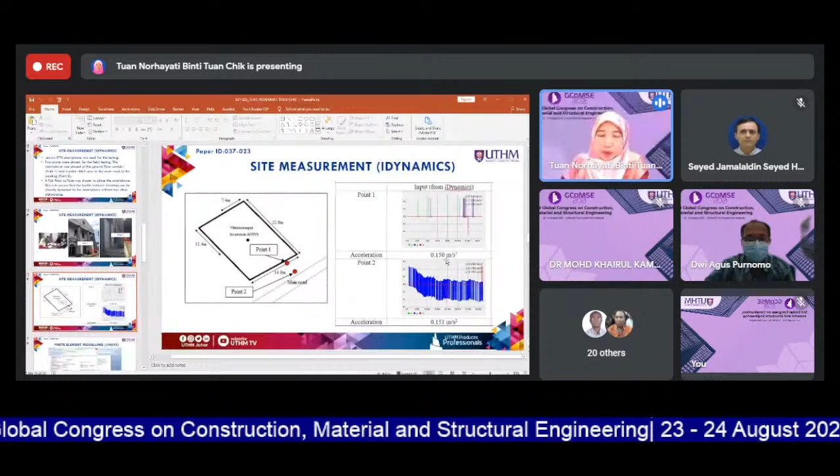Okay, so after we got the vibration signal from the site measurement, in the second phase, what we need to do is model the real building in ANSYS via finite element modeling using modal analysis and also transient analysis. So this is the script, the common method that we use for the modeling. And here this is the main building. And then finally in ANSYS we got this building like this.

Okay, so for the modal analysis, we obtained the first mode at 2.57 Hz. The fourth mode is 3.89 Hz. So here you can see how the building looks in ANSYS software. Here are the results that we obtained from the transient analysis, and then we compare. This one is input from the iDynamics smartphone application, and this one is the output from ANSYS. So we got 0 meter per second. Why is it 0? Because the acceleration is too small when we model in ANSYS.

Okay, so after getting the data from ANSYS, we need to transfer it to another software, MATLAB, to model the vibration criteria analysis, which we call the VSATS tool, for vibration serviceability, to see the vibration response, because we want to compare with the Gordon guideline that I showed you before.

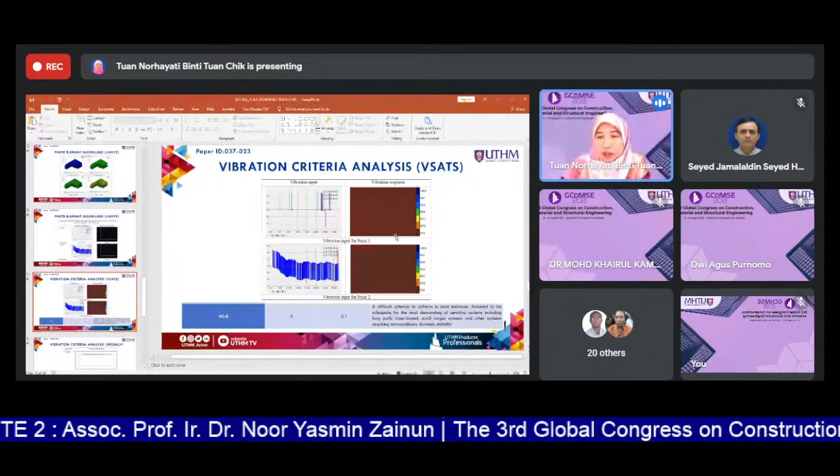Okay, so for the vibration input for point 1, the vibration response we got from VSATS is, as you can see, all brown, which shows that it falls into VCE. Same goes for point 2 as well. It's also all brown and it falls into VCE.

So when we compare to the Gordon table, the description of VCE is a difficult criterion to achieve in most instances, assumed to be adequate for the most demanding of sensitive systems, including long path, laser-based, small target systems, and other systems requiring extraordinary dynamic stability. So what that means is VCE is really small.

The vibration signal is really small, and the results that we obtained fall into VC-E. Another tool that we checked is similar. It is also in MATLAB, but we call it MODALV.

So in MODALV, we can plot point 1 and point 2, the vibration signal. So the time history is like this. This one shows that there is no result, it shows 0, because the vibration signal is really small, so it cannot capture the exact time history.

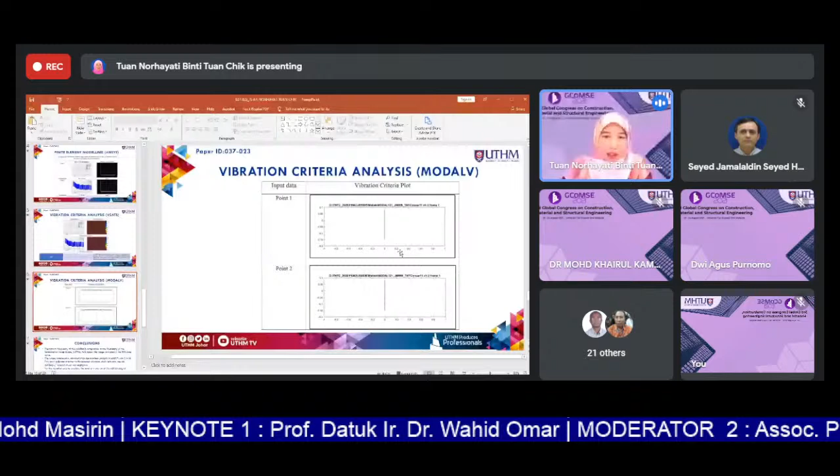Okay, so the conclusion that can be made from this investigation: first, the natural frequency of the building is acceptable, as the frequency of the fundamental mode shape, which is mode 1, is 2.57 Hz and falls below the range stated in the ISO base curve. The output acceleration obtained from the transient analysis was 0 millimeter per second. This result indicates that traffic vibration acting on the whole building is

negligible. For the vibration criteria analysis, the level of vibration fell on VC-E, which is the lowest level of the GVC plot implemented by Gordon guidelines. This has shown that the traffic-induced vibration does not show any significant effect on that building, meaning that the traffic flow near the building doesn't affect that particular building. Therefore, it can be concluded that the whole building of Telecom Muar was not affected by the traffic vibration that occurs around the building.

I made some recommendations here as well. To get better results, an accelerometer is recommended to be used to determine the traffic-induced vibration in the future, in order to obtain the vibration signal accurately compared to the mobile applications. Further checking needs to be carried out to determine the accuracy of the vibration measurement using mobile applications.

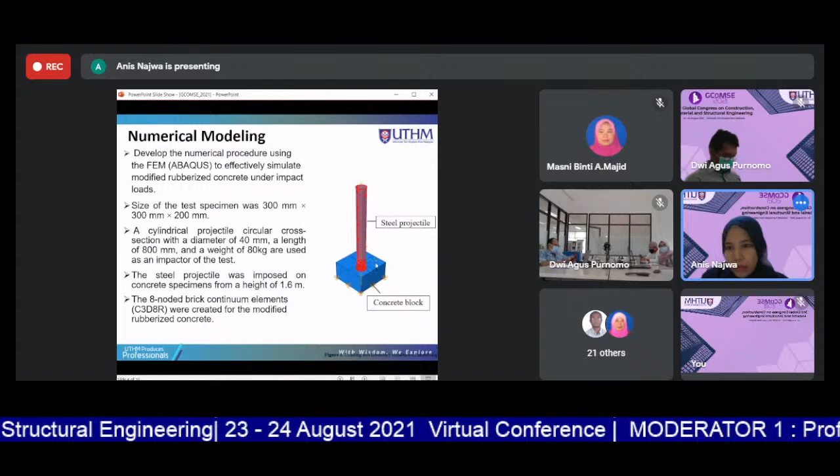So this is the numerical modeling that has been used: the development of a numerical procedure using FEM Abaqus to effectively simulate modified rubberized concrete under impact loads. The numerical modeling uses Abaqus software, and this figure shows clearly the sample. Down here is a concrete block; the normal one, the control, is 0% rubber and also 0% rice husk ash.

And then it keeps on with increasing percentages of rubber. The size of the specimens is about 300 times 300 times 200 mm. And up here is a steel projectile, which is free falling from about 1.6 meters high. Its diameter is about 40 mm, the length is 800 mm, and the weight is about 80 kg, as in the free falling test.

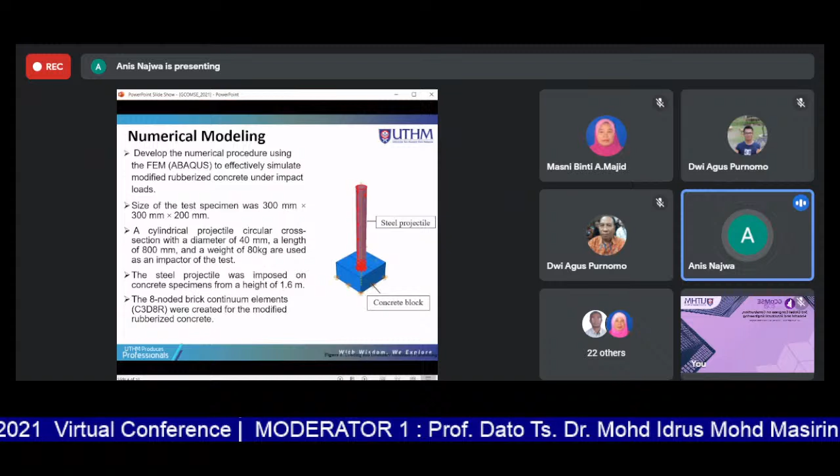And then 8-node brick continuum elements were created for this modified rubberized concrete in Abaqus. The velocity is about 4 meters per second, as in the experiment, and then for the software it keeps increasing to 5 meters per second and 6 meters per second. The boundary condition is assigned at the bottom part of the concrete block, so that when the steel projectile free falls, the concrete block does not move. And it targets the center of the concrete block.

So these are some of the material properties of the model. The rubberized concrete elements adopt 3 different material descriptions in Abaqus: DP, MDPC, and CDP. DP is Drucker-Prager, MDPC is modified Drucker-Prager Cap, and CDP is concrete damage plasticity. So here we would like to use these 3 and find out which one is suitable and applicable for the rubberized concrete.

So this is the material properties of the rubberized concrete, which we get from the experimental work. The rice husk ash and crumb rubber for the control is 0%, and the rice husk ash after that is 10%, which is from the previous study. It shows that 10% of rice husk ash is actually the optimum percentage, which can help to cater the problem of the drop due to rubber, since when we partially replace sand with rubber, it can cause a drop in compressive strength. And RHA is partially replaced for cement, about 10% replaced by mass.

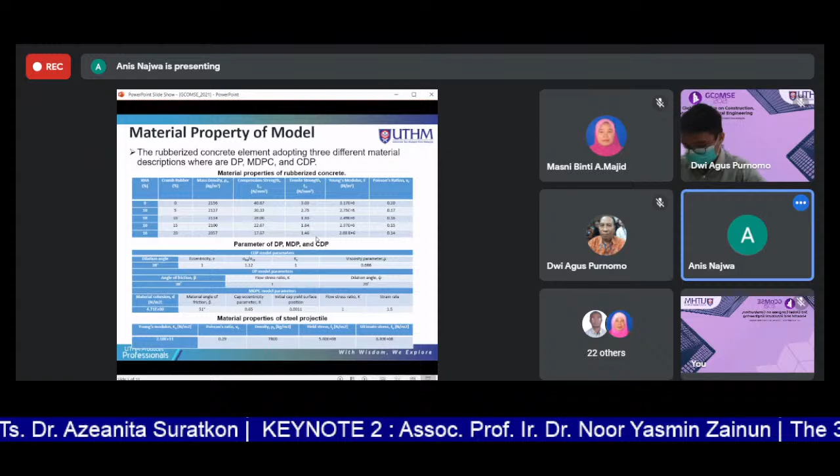And the mass density, compressive strength, tensile strength, Young's modulus, and Poisson's ratio all come from the experimental data. Then the parameters of DP, MDPC, and also CDP, this study got from previous studies. The eccentricity, material angle, and also the material properties of the steel projectile also came from previous studies. So this is the results and discussion.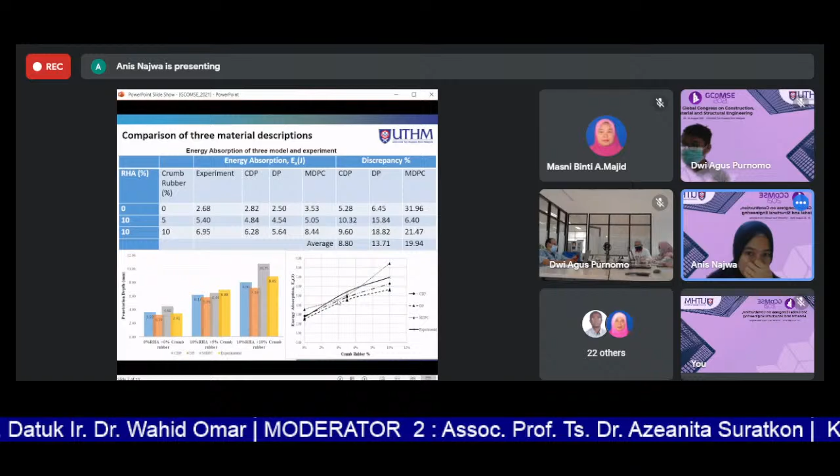So to be clear, here is the figure and also the line graph and bar graph. It shows the penetration depth versus the percentage and also energy absorption versus the crumb rubber. It shows that compared with the experimental, CDP, DP, and MDPC, CDP concrete damage plasticity is closest to the experimental here. Okay.

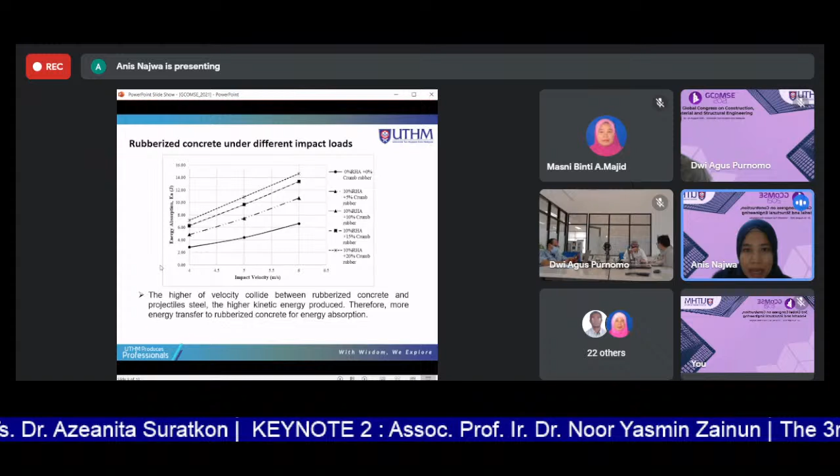So for the rubberized concrete under different impacts, here are the different velocities used and also the energy absorptions. The higher the velocity, the higher the energy absorption result. And what is most interesting here, the higher the percentage of rubber replaced, the higher the energy absorption. This is quite interesting because it shows that rubber is good in terms of energy absorption, so it can be used as a concrete barrier. Therefore, more energy transfers to the rubberized concrete for energy absorption.

So for the conclusions, it shows that the CDP, concrete damage plasticity model, produced a highly accurate result in FEA modeling compared with DP and also MDPC. It clearly showed in the previous slide that concrete damage plasticity gives a result closer to the experimental result. And the failure profile of the rubberized concrete in the model is almost similar to the experimental observations. So it's quite good. And the crumb rubber in concrete actually generates a good result for energy absorption.

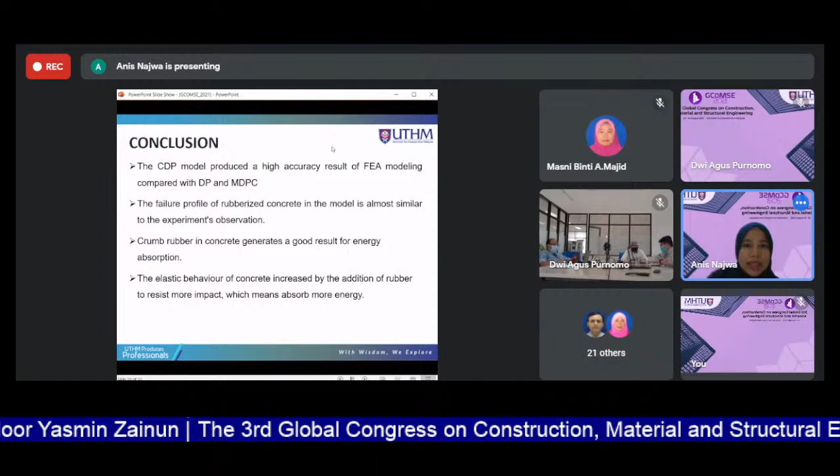Therefore, the elastic behavior of concrete increased with the addition of rubber to resist more impact, which means it absorbs more energy. So to highlight the conclusions, to model rubberized concrete, the concrete damage plasticity model is the more accurate one, not to say accurate, but better. And the replacement with rubber actually helps a lot to give a good energy absorption result compared with normal concrete, which does not have rubber.

So it can help, first, to reduce the waste, the production of waste from stockpiled tires. And second, it can give good energy absorption, which can reduce the impact and reduce the damage to the vehicle when an accident occurs.

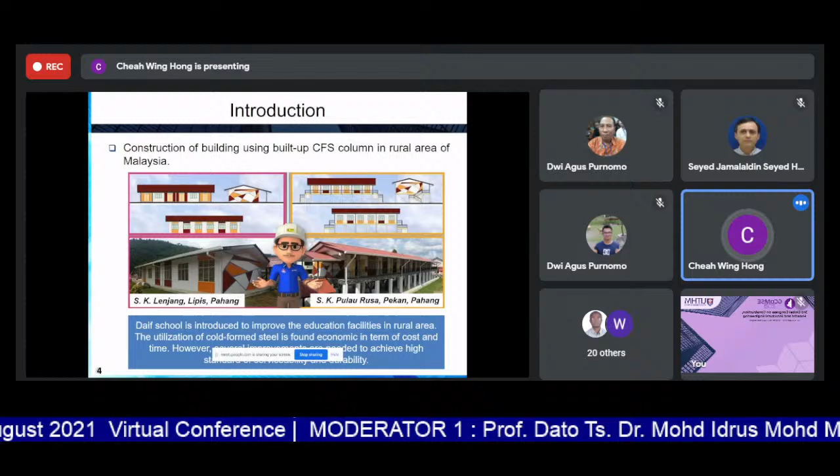This type of built-up CFS column is actually applied at Daif School. For your information, Daif School is under the full scheme of the Ministry of Education to provide education facilities in rural areas. So this research studies the built-up CFS column that supports the Daif School, such as in SK Pulau Rusa, Pekan, Pahang, and SK Lenjang, Lipis, Pahang, to support the structure. Our built-up CFS column design is exactly the same as the Daif School built-up CFS column.

For the problem statement, the design of the built-up CFS column follows clause 6.4 in EC3, similar to hot-rolled steel members. The major issues arise from the design of built-up CFS column in terms of strength and stability towards compression force. A built-up CFS column is prone to buckling, but this can be resisted using the batten. However, the use of the batten depends on the design of the column, and EC3 has not specified the equation to determine the critical load.

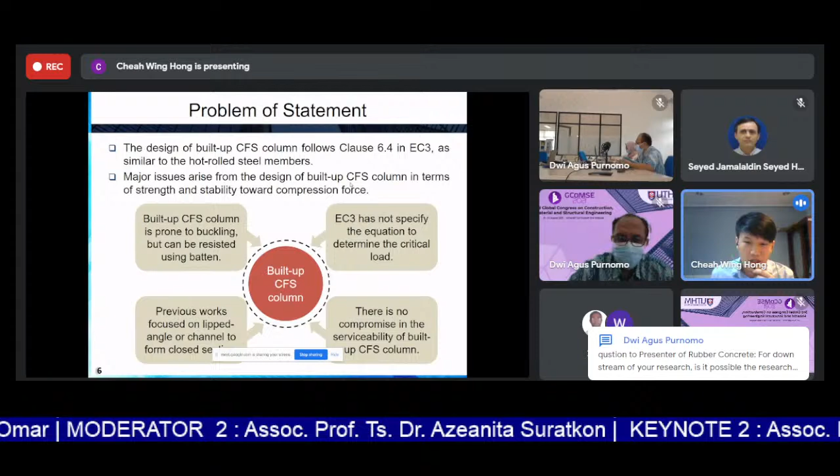According to clause 6.4 in EC3, it only specifies the design shear force VED and the design action NED; it does not specify the design critical load. Previous works on build-up CFS columns only focused on the lip angle channel instead of the closed section channel, so they did not really focus on the closed section, which is similar to the design of the CFS column in this research. Lastly, there is no compromise in the serviceability of a build-up CFS column.

These are the objectives of this research. First, to simulate the build-up CFS column subjected to compression force using a program called ValSim, with the main design of the CFS column being a closed section. Second, to analyze the force-displacement curve of the build-up CFS column for different section properties, namely the thickness and size of the CFS column. Last, to evaluate the effects of section properties on the ultimate strength, displacement, and failure mode of the build-up CFS column.

For the design and specifications of the build-up CFS column, it consists of the SHS as the vertical member, as shown in this schematic design, with a metal plate as a stiffener and rivets as the connector.

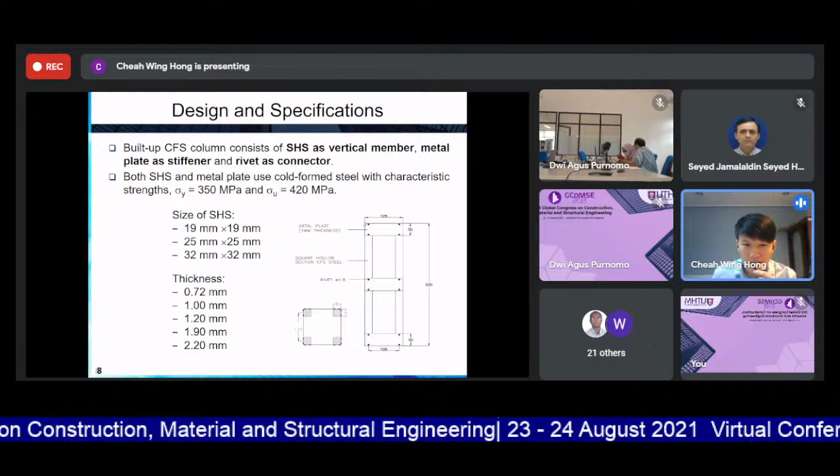So basically, the size of the SHS will be comprised of 3 different sizes: 19 mm by 19 mm, 25 mm by 25 mm, and 32 mm by 32 mm. The SHS will use a yield strength of 350 megapascal and ultimate strength of 420 megapascal, with 5 different thicknesses as stated below. However, the thickness of the cold-form steel shall not exceed 3 mm.

These are the schematic design of the CFS column. The length is about 125, and the metal plate thickness is about 1 mm.

This numerical modeling is based on a previous experimental study conducted by a student in UTHM. The experimental study on the built-up CFS column subjected it to compression force using the universal testing machine, with the compression force applied incrementally at a speed rate of 4.17 kilonewton per minute until the appearance of yielding or total collapse.

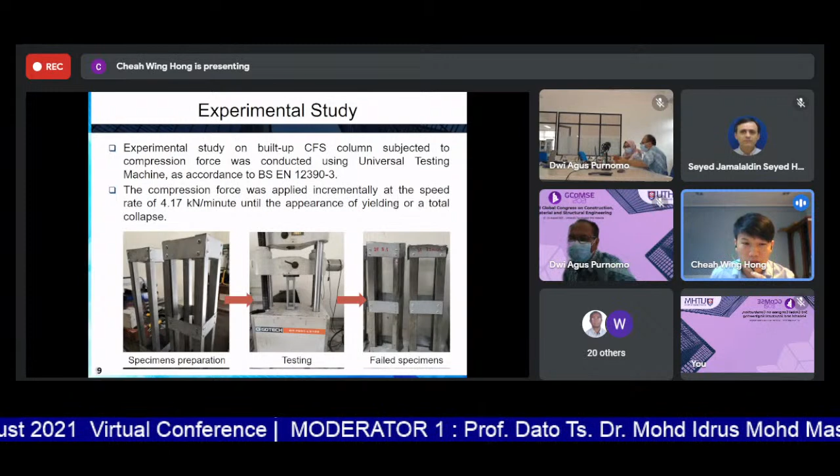We initiated with specimen preparation, which is the fabrication of the built-up CFS column, then went through the compression test using the universal testing machine, ending up with the specimens failing. Next we'll enter the numerical modeling.

The numerical modeling was conducted using software called ValSim. This finite element modeling program requires the definition of geometry, material model, loading, constraint, and contact surface. The built-up CFS column was modeled in three dimensions and discretized using tetrahedral elements with an unstructured mesh.

I would like to draw attention that for the mesh size, we did not use a mesh sensitivity test. This is because in ValSim, the mesh size is automatically defined using the adaptive refinement method, so the mesh size is around 10 mm to 50 mm. This is why no mesh sensitivity analysis is required.

Next we'll define the mechanical properties and hardening properties of our model. For the mechanical properties, the density, Young's modulus, Poisson ratio, shear modulus, yield strength, and ultimate strength are based on the previous experimental study.

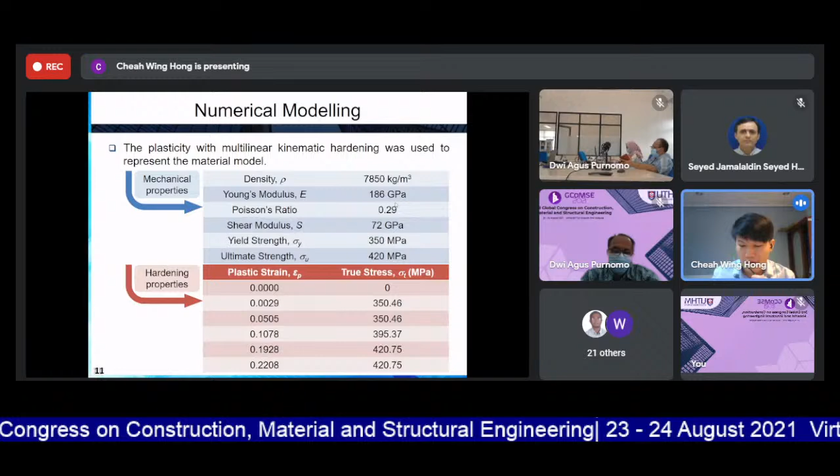An incremental concentrated load was imposed in a downward direction towards the top part of the square hollow section, applied at the top for 1 second with 15 substeps. This signifies the compression force produced by the universal testing machine at a speed rate of 4.17 kilonewton per minute.

Constraint is specifically used to represent the support and control the translation of the built-up CFS column. For the bottom half of the column, it was defined as a fixed support, allowing the constraint to become true in all x, y, z directions. This restricts horizontal and vertical movement as well as induces the reaction force. On the other hand, the top part of the built-up CFS column was free.

The bond mechanism between the rivet and steel plate to the SHS must be provided using the contact surface. In this numerical modeling, perfect bonding was employed as the contact surface, requiring the definition of master and target geometries for the built-up CFS column. The body of the rivet was selected as the master geometry, while the interface of steel plate to the SHS was defined as the target geometry. In this condition, no sliding and separation was allowed between the geometries.

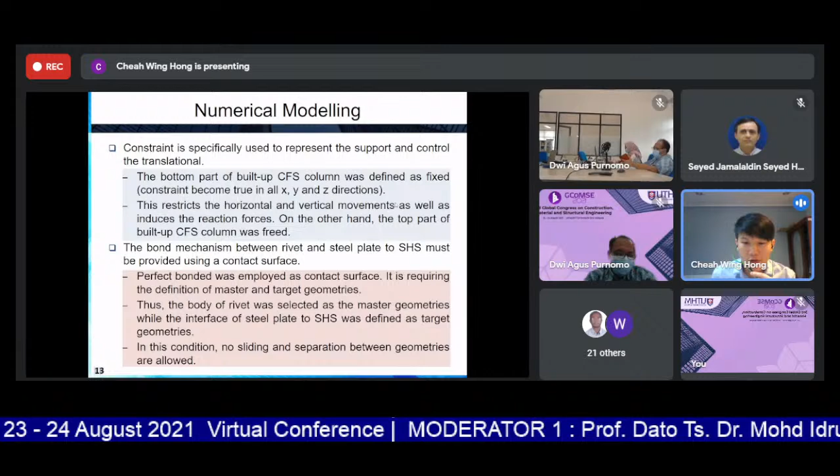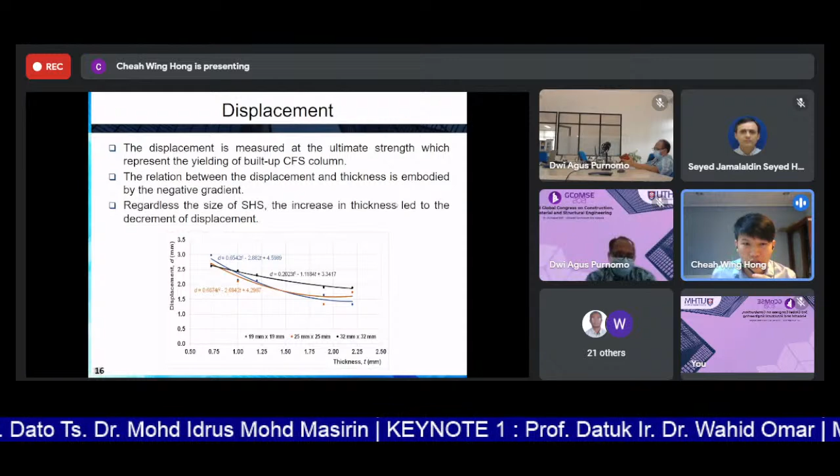So the displacement is actually measured at the ultimate strength, which represents the yielding of the built-up CFS column. The relation between the displacement and thickness is embodied by the negative gradient, and regardless of the size of the SHS, the increase in thickness actually leads to a decrement of the displacements of the built-up CFS column.

Next will be the failure mode of the build-up CFS column. The initial failure mode is indicated by the yielding behavior before experiencing total collapse. The build-up CFS column is less susceptible to buckling when the size gets larger, and similarly, the thickness causes a lesser rate of increase in deformation as the column becomes thicker.

The failure mode may be localized or globalized across the size and thickness. For SHS of the smallest size, 19 mm by 19 mm, it suffers from distortional buckling throughout the whole length. This figure shows the SHS with size 19 mm by 19 mm with a thickness of 0.72 mm and the largest thickness of 2.3 mm. As we can see, the thickness of 0.72 mm shows greater distortional buckling compared with the thickness of 2.3 mm.

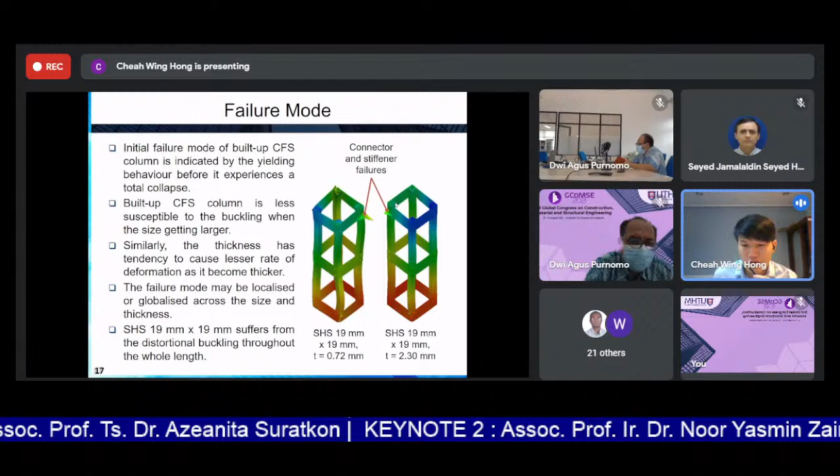So lastly, the conclusion. This study was conducted to investigate the effect of section properties in terms of size and thickness. The numerical modeling was successfully performed, and the ultimate strength and displacement were quantitatively measured through the force-displacement curve, while the failure mode was observed visually.

It was found that the ultimate strength of the build-up CFS column gets stronger as the size of the SHS becomes larger, and similarly the thickness gave a favorable agreement. On the other hand, the displacements of the build-up CFS column show a decrement trend when the size and thickness get bigger and thicker. In terms of failure mode, it was found that the build-up CFS column suffers distortional and flexural buckling as well as connector and stiffener failures.